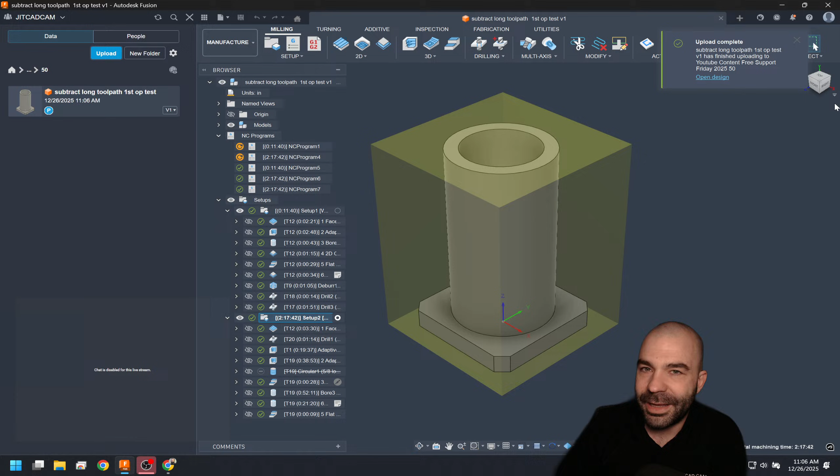All right, so first and foremost let's take a look here. Setup 1, let's get this in place. We are utilizing a stock box point. Now, given that it is a stock box point, our stock is fixed size. We're on center, on center, on center. Everything's checking out here pretty good.

Now, when we go into setup 2, let's go ahead and take a look here. Model box point. Now this shouldn't affect anything, but we're going to pull a couple of dimensions here.

This is my opinion at the end of the day, right off the start, Elijah. I would tell you instead of using model box point, you might actually do something like selected point and then grab this ring at the top, because I assume you either don't have the bore here—actually, you're upside down, right? So as you can see, I can get on center of the bore at the end of the day. That might be much better for what you have.

So as you're going to see, we now are going off of that exact edge. Let me read through—you're putting a lot in chat, so I'm going to get everybody caught up here. The last time you tried to run the end mill, it didn't even touch the face of the part. The end mill was way too high.

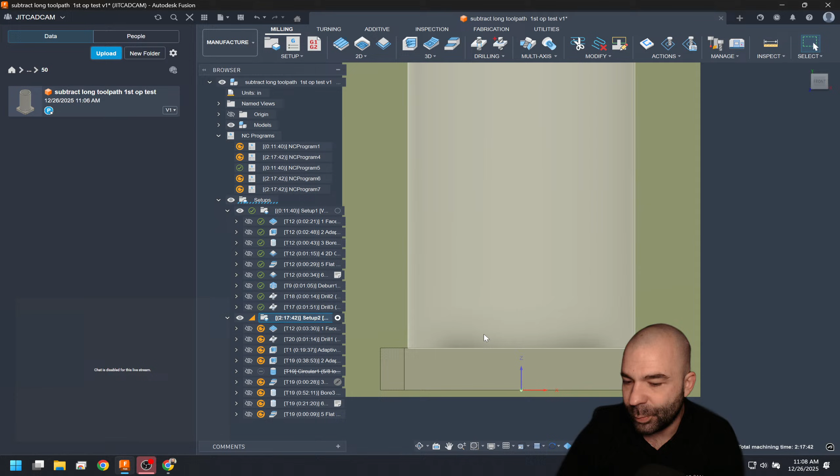Let's take a look a little bit further now. First and foremost, it looks to me like you are touching the top of the part. Your G code here is going to come from the actual WCS system. A few things I would look at—let's just make sure this is on center. So we're 118 there, for those of you out there, we'll go out to 4 decimals, not that we're going to see a difference. Again, we're going to go bore back the other way. We're 118, so we look to be on center in X and Y. Now, from that, I would say everything kind of checks out from a G code standpoint.

So what I would tell you now is if we posted this exact code, we're going to go ahead and put this through. Actually, we could use the dumper—actually, we can't, because I don't want to waste time trying to pull it through another post. If I remember correctly, what kind of machine do you have there?

Jeff, another top tier subscriber—Merry Christmas to you, buddy.

Let's just go ahead and put it on a Fanuc. It'll be all right. What we're looking for is XYZ. So right off the start, we are Z call out 4 for G01, 4.08. We're doing a G18 to 4.03, and you have I, J, and K motions. Again, we have a vertical lead arc.

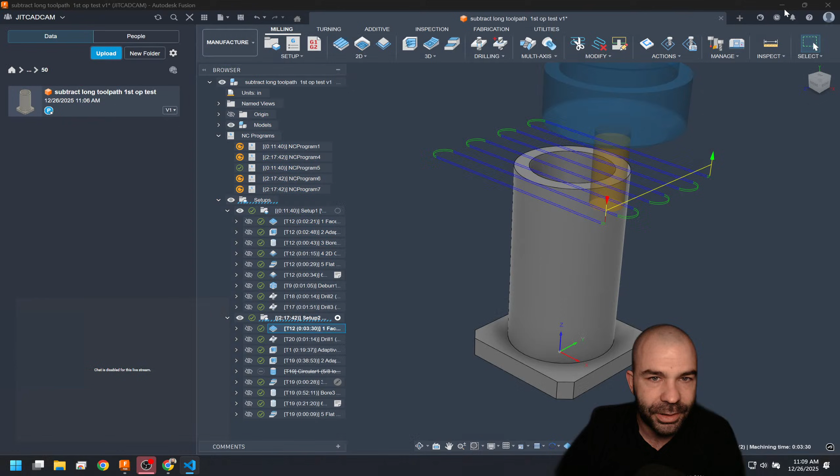So let's take a look here real quick. We're at 403. Measuring this guy out, we're 4 even. And with that, I would assume you are making multiple passes. So this is some tricks you guys could do when you're trying to troubleshoot something—I'm just looking for the math, which means I am zeroing out vertical and making a single pass. Because the G code, if it's not touching in Z at all, is the G code wrong or is the machine setup wrong, right? As you're seeing now, we're going to Z 4 inches exactly.

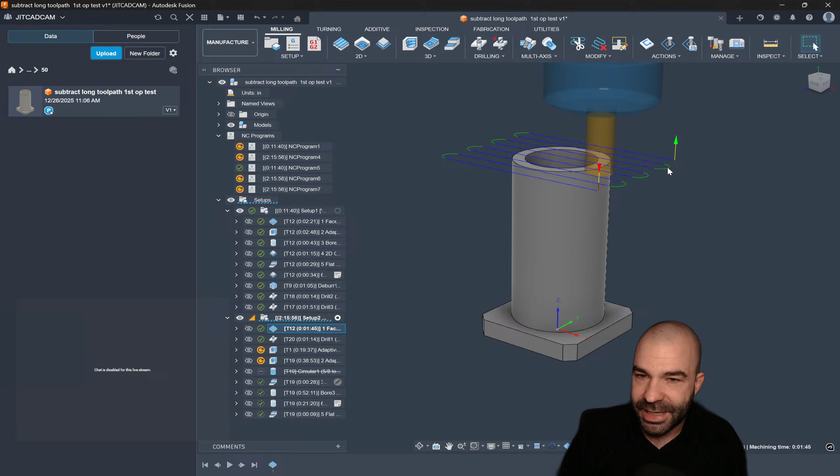So the face is 4.0625 high, and the actual part is 409. I'm touching off the jaws itself. Okay, we're getting a little tricky here because your math that you're telling me in chat does not line up to your physical part. So again, if I measure the length of your part, the length of your part is exactly 4 inches.

But you're saying 40625. Let's go ahead, let me do this—give me 1 sec here, guys, we're going to run through this. You're already facing off the back side of the part, which means you should be at 0. I think I kind of understand where your dilemma is coming from, because up here you're touching the stock, right? And then your stock is 4125, but because you're on center that would give me 0625 per side, right?

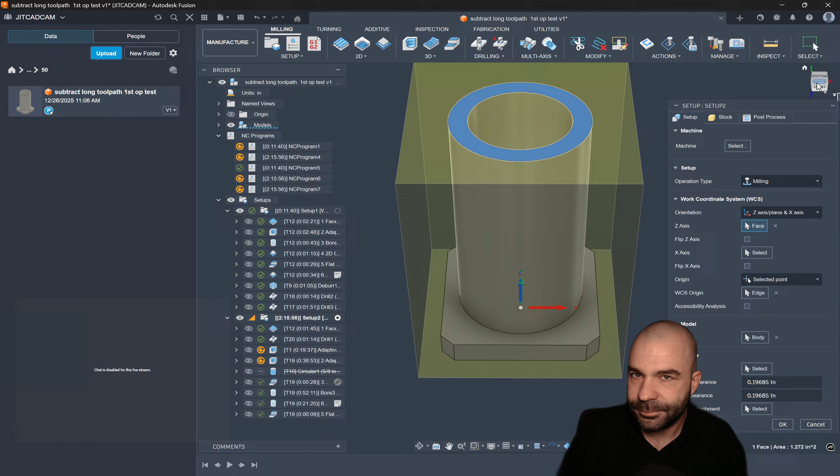So when I flip my part over, I've already accounted for this. Let me get this closed up so you guys can see this a little bit better, 0625 here. So you're saying from my WCS to the top of my stock should be 4.0625. Yeah, so that checks out at the end of the day. As you're seeing right now, based on the math, 4.0625 is the top of your stock. That's correct.

So I guess my question, and we could demonstrate that here. Let's do this. I'm going to run a facing program, and we're actually going to machine to stock top, not model top. Then we will bump our top height up just a hair so we don't get any errors. If I post out this one now, this would be in a perfect world for you guys wondering. As you guys can see, I'm now at Z 4.0625, which is where my Z height is for facing off.

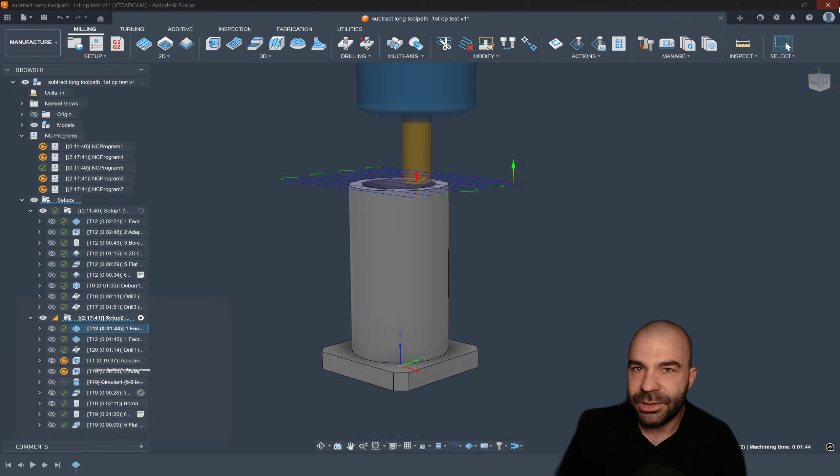So there is facing across the top of this part. And because my stock—if I do my fancy dancy F8 here, and of course we need some transparent stock, looks like we're not going to get it the best here—but as you guys can see, I am facing off at exactly stock 0, which is 4.0625. And then I have a secondary facing on model height, which is now touching the part.

Right now the part is 409 and the end mill is still not touching. So a couple things I would suggest: check how you're holding this in a jig and fixture. Is your Z height in the proper location? That's always rule number one.

I am going to scroll up here real quick. Fish, out there, sometimes I'm generating a body for a new job to see where and how I will run the part. The setup tab does a good job generating stock, but I want an actual body to use for fixturing. Okay, M-Fish, I will visit that here in a second.

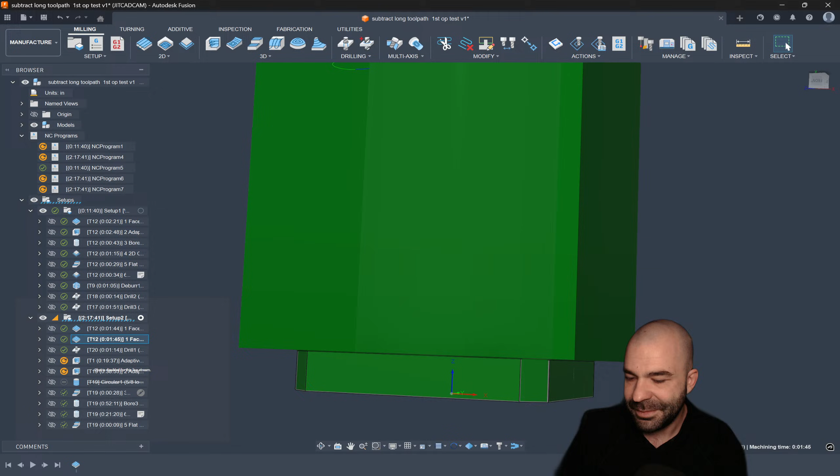Using a Haimer—well, are you lowering Z height on the Haimer? I'm not trying to call you out, but presumably what I would suggest, Elijah, is that you need to check the math on everything.

So if you're using a Haimer, you don't have a presetter, which means you're setting tool lengths manually. Where are you setting tool lengths off of? That would be my next question. Getting back to the question from M-Fish.

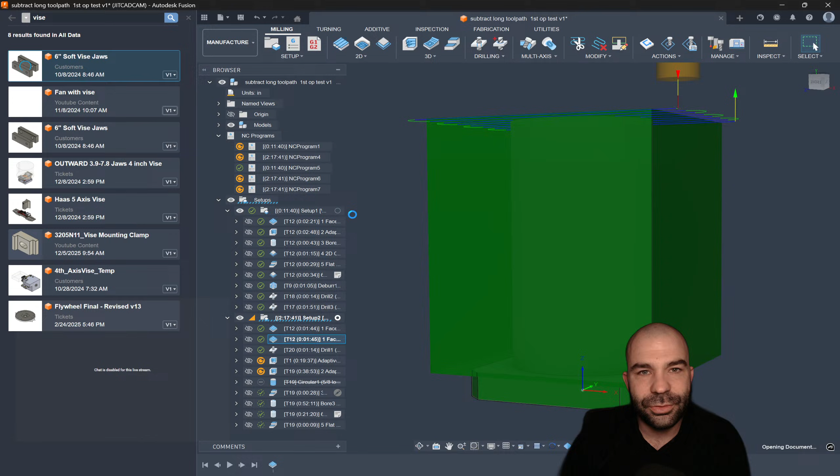M-Fish, we did several videos on this, but what I would recommend when you're talking about your stock being a solid—this is where we've done videos on vices and using parameters. Now, full disclosure guys, some of these videos might be a little dated, but the idea is still the same at the end of the day: when you have your vice and your stock and everything in place, that's a solid body. Now if you want, Fish, for me to go through and set everything up from there, let me know.

Okay, the table with a Haas digital tool setter—so you have a presetter, but you don't have a spindle probe, right? And I assume when you touched off your presetter or your Haimer, you allowed for the distance to get to the center of the ball. I'll give you a minute to answer.

So if I was looking at wanting to do something with stock, real quick here Fish, this is how I personally would do it: you would start with a new file. Let me get back to my Free Support Friday folder. In that actual model—this is a little bit of organization that I use, guys—I start a new folder, and this might be my part number. Let's say it's TAC 1001. Inside that folder, I would need the part.

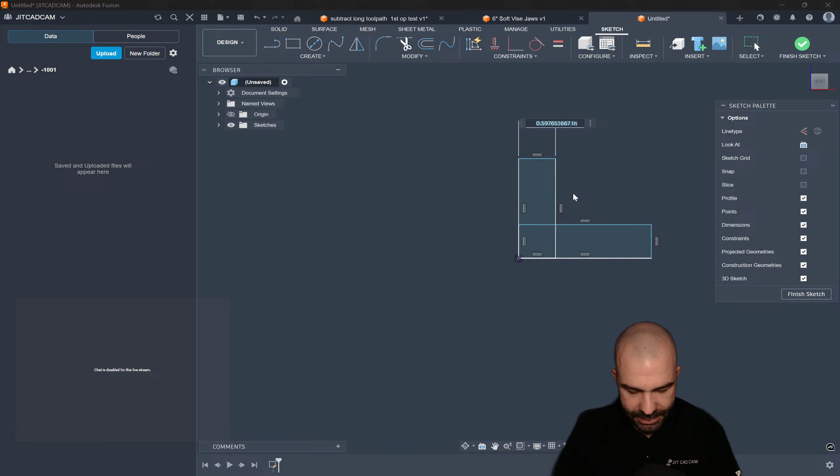Now I'm going to generically create a part real quick just to demonstrate this out. Let's say we're working with something like an L bracket, 0.5, 2 by 1, and let's say this guy's going to be 0.250. So let's say I need to make this part. As you're going to see, this is going to be physically the part.

And you would have already uploaded that. So just be aware. From that, though, this is where I would start a blank file.

And this file in itself would actually be like my TAC 1001. And then I like to call it my manufacturing, because this is where I'm going to apply my toolpath.

That allows me to insert my part into this file by dragging and dropping and link it back to the original. From there, I have full freedom to go in and make a new component that is going to be for the stock itself.

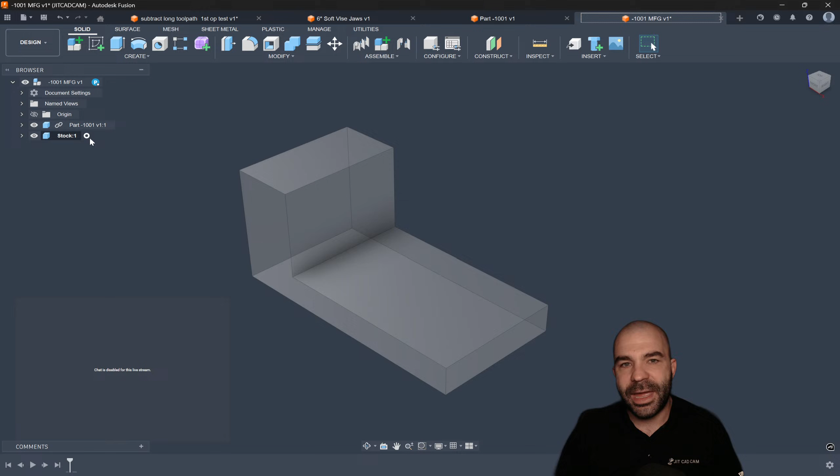And with that active, I can generate my stock. So if I wanted to simply create a box, I'm going to go ahead and create a box here.

And now this is going to be my stock size. Let's say we're going to go 3 by 4 by 5. I know this is obnoxiously big, but I think you guys are going to get the point after the fact.

Because these are components now, this is where I could do something like a joint to place my part inside of my stock and lower it whatever that distance is for manufacturing.

So as you guys are seeing me do this, it's a little messy because one, my stock is in the way, but now I have a physical solid for stock, and then I have a physical component that is my part.

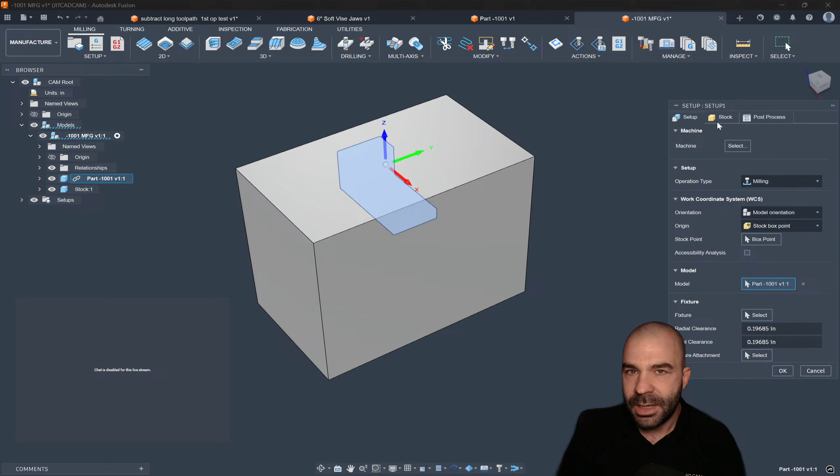So again, we're going to go from solid, pick that stock. And just like that, I now have a solid versus my part.

It has a little disc that you push down and tells you, okay.

All right, jumping back a little bit. Elijah, the main problem is the tube is offset from the square. In my last attempt, I drilled a hole all the way through the part, and I'm going to indicate it and run it.

So a couple of things, Elijah. One, you should send me my favorite price tag of two blank checks and have me fly out there and help you.

But what I would go back to and talk to you about on this part is if you're having alignment issues from setup 1 to setup 2, I don't think it's in Fusion, because I did make the change of going off of stock box point or selected point from model box point like you had.

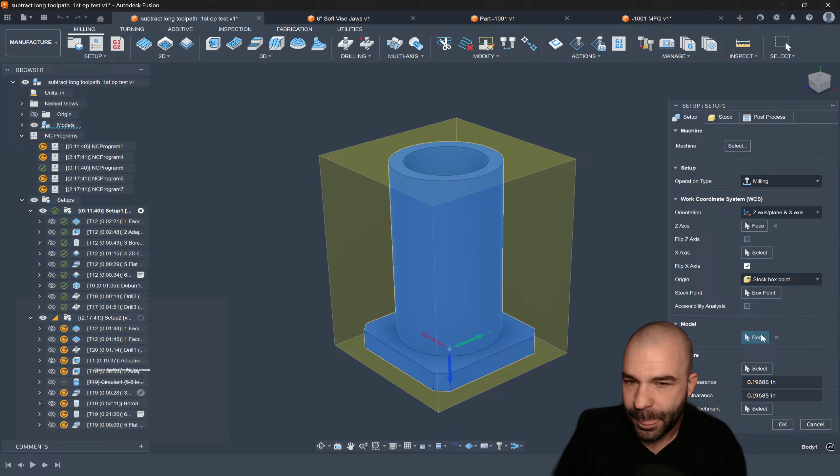I don't think this is your problem, if I'm being honest with you. The only reason I say that is because when I now looked at your design tree, there's quite a lot going on in here. Now, if I needed a specific component, I always go off that physical component.

Again, I see you got stock as a fixed size. That's fine. But now my continuous rest machining is going to require me to also select the same model down here. I don't think this is your problem from what I'm seeing as a whole.

I just know that that could be the problem at the end of the day. Again, let's just go ahead and get everything regenerated here. But yeah, from what I'm seeing, I don't think it's a Fusion issue at the end of the day.

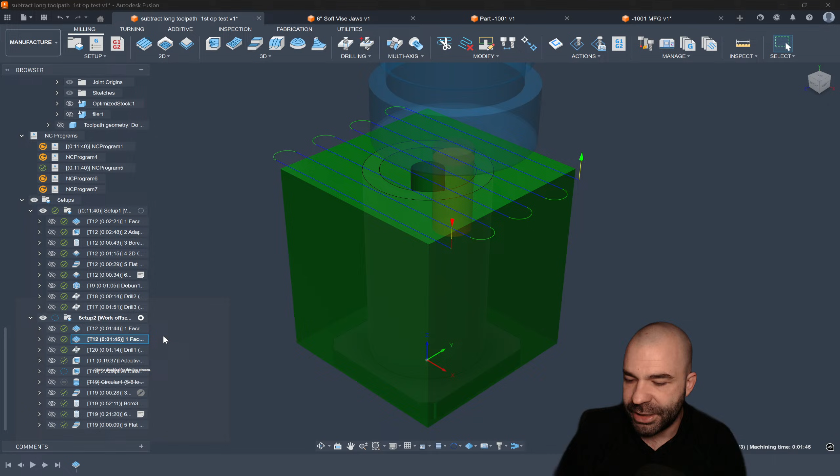I think it comes back to more of something is happening when you go to set up this part. Maybe there's something wrong with your Haimer, because again, this hole 118 this way, 118 that way.

This all looks good. This hole is on center of this hole. There's no error on distance. Again, all of this stuff is checking out pretty good at the end of the day, so it's hard to say exactly what's going on.

Use the setup tab to determine the stock size you need. Can you make it a solid and locate it based on the setup information?

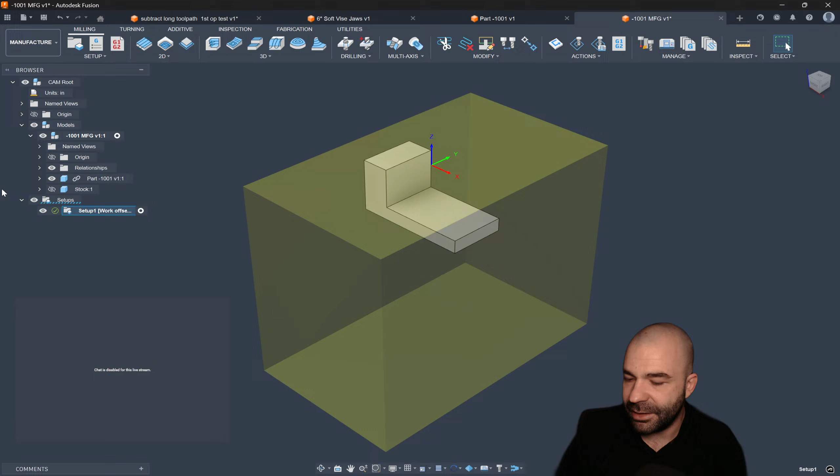So Fish, maybe I'm not getting exactly what you're looking for, because at the end of the day, I showed you guys you need to make your stock either a solid to control it, or if I was running a setup, I'll make a new one. Part, stock, solid. If you're trying to align this a certain way, I could offset left side 0.1, offset from top 0.05 for facing, and offset from backside 0.1 as well. As you can see, I've shifted my part to a certain corner of the stock.

I need to see exactly what it is you're trying to do outside of that, Fish.

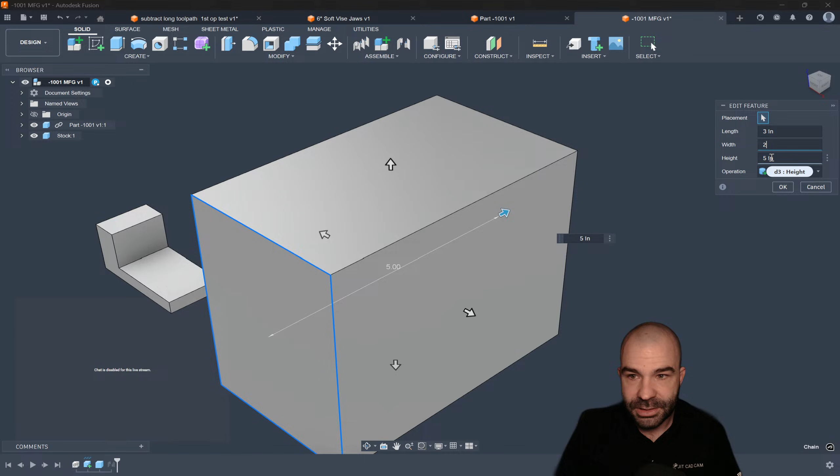As you're seeing in this setup, I'm using fixed size box. However, on the setup side of things, that first time round, I have a solid that I modeled. So if I went back to design and changed that stock size I generated, let's say we go 3, 2, 2. As you're seeing, I've now made that stock smaller. Pro tip for you guys: depending on what you're doing, you can change the opacity of your stock to make it easier to see your part inside of it.

You had a machinist buddy set up with you and it still came out wrong.

So let's do a little bit more diving into this then. I do want to let you guys know, I see a lot of people coming and going here. If you have questions at any time, anything in particular you want to see, feel free to ask in chat. There's also a support link down below for you to submit a ticket with your problems.

Got to get me another chug of some coffee here.

So, diving back into this a little bit more. Let's go evaluate a couple of things real fast. When we are posting out right now, we are using the latest Haas pre-NGC post.

Now something you guys can do out there, I'm going to pull this up on my other page and bring it over. Although the post may have gotten an update as of 10 days ago, we can see what has happened inside those updates. Based on this information - fixed under warning messages, fixed a potential issue when outputting multi-line comments - all of this stuff seems to be all right on my side. I don't see anything different.

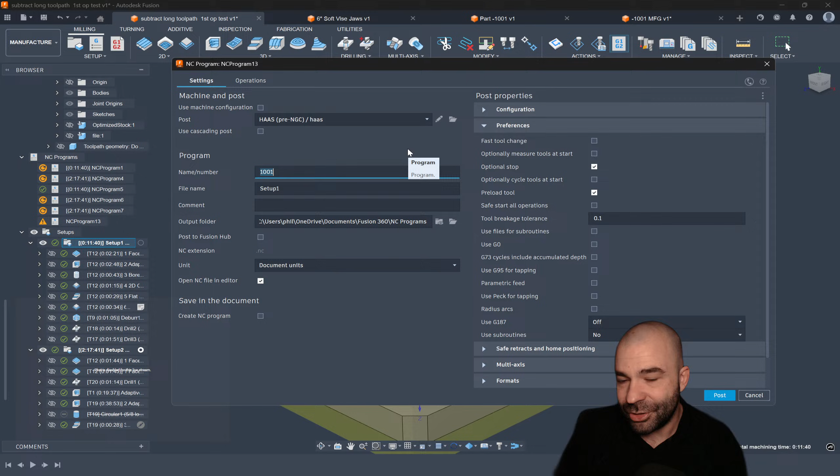I'm going to go back to that original toolpath. I took some stuff off of your toolpath as of right now. But if I post process and use the dumper - I love the dumper post, that's in your default post library guys - what this allows me to do is get some mumbo jumbo worth of information. But if you have the Autodesk post utility installed, you now have the ability to do a custom.

You guys see this? I assume this is behind the chat window, let me scoot it over here. Let's half screen it, right? So as you guys can see what I'm doing now - my big head's in the way, I can't win - under CNC selector, this is a debugger.

Now you're going to get what's called the custom, and what that's going to allow you to do is generate the exact program off a post. So let's get our posts now opened up.

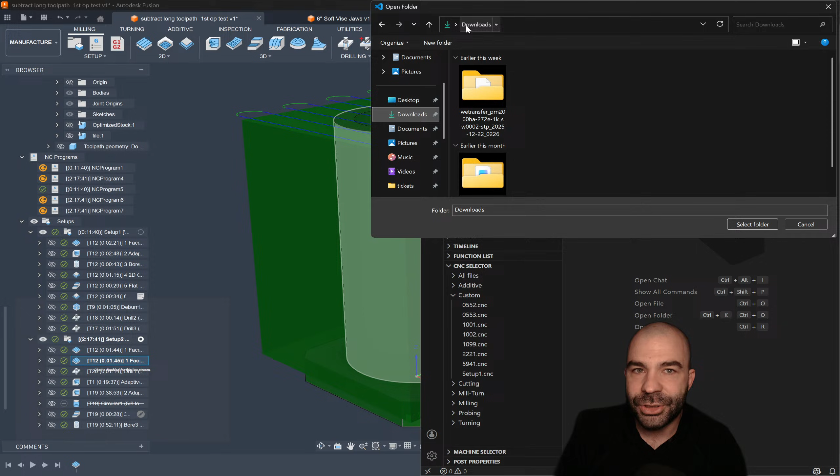I'm going to go ahead and go to my downloads folder, which for some reason I'm not seeing the post processor in here. Oh, because we're selecting the folder - what a goofball, right? And then we're going to go ahead and close this all out. Now you can see I have a lot of things in my downloads folder.

As you're seeing, I can go ahead and open up both these posts. I'm going to go back to full screen now, guys, you're going to have to bear with me. And then we go to custom.

As you're going to see, depending on what post I click on, if I click 1001, there's the code generated. Based on this rev, right now my Z is doing a lot of funkiness, so I think my 1001 went to the wrong area. I'm going to go back and fix that - should actually be setup 1 NC.

But what I'm going to do is, again, 1001 here, 1001 there. We could generate code off those posts in real time. So give me 1 sec here because I'm going to go back and repost that code. We're going to give it a number. So it should be setup 2, but let's go 2001. And let's just say it's also 2001 here.

And this is the problem. It's putting it in a specific place. That's fine. Let's see if we can refresh this list. Maybe I'm crazy, maybe it's putting it in the wrong place for some reason and I'm just not seeing it. I might have to do some debugging on my side, guys.

See if it's in here. It is not in here. So let's go ahead and copy this address. Go back to Fusion for the last time, hopefully. There we go. And let's get this closed out.

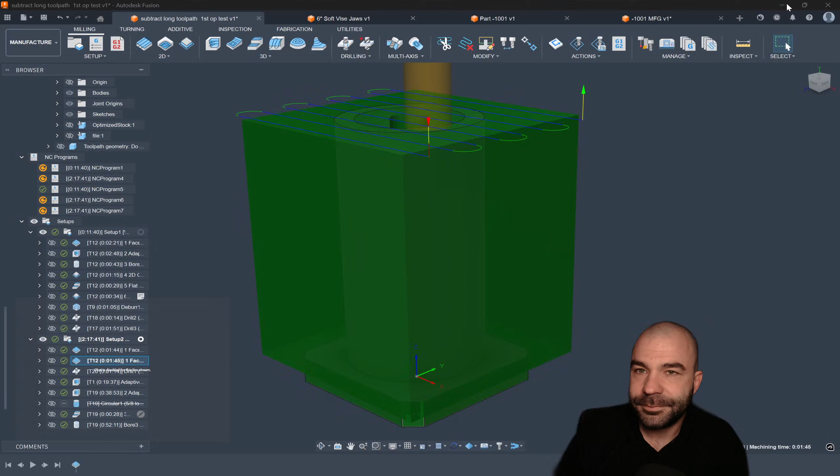Y and X were wrong also. So, I mean, the only thing I could tell you is, one, Y and X is off, Elijah. So you got X, Y, and Z all off in some way, shape, or form, right?

That's what I'm hearing. So if somebody came to me and said my X, Y, and Z is all off, I think there's a problem with your Haimer. That's what I'm going to tell you. Honestly what I'm going to tell you. And that's without physically being able to put my hands on it and see what's going on. There's a lot of questions.

I mean, M-Fish is right. The Haas does have the ability to put other offsets in. You've also used an edge finder. Still wrong.

I don't know, man. I really don't know, because at the end of the day, if I was to also do, and this would just be my sense on this, I'm going to do a 2D contour around this part, right? And if I post out this 2D contour, again, let's go ahead and get back to that Haas pre-NGC post.

Does my Z's all seem to line up? And then is my XY also working? One thing you guys can do, again, this is just something if you guys didn't know, go ahead, file, save as this. Looks like it's saving to where it needs to go, but we're going to go ahead and throw this on my desktop because, again, we could take our NC code and run it through something like NC Viewer.

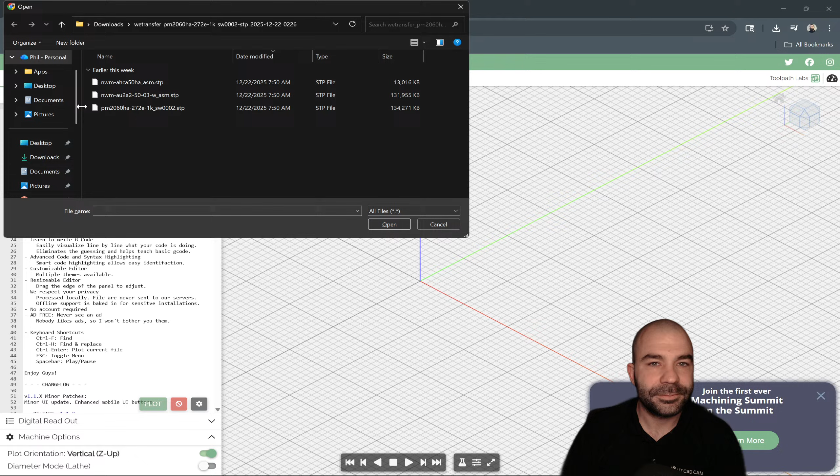So give me a quick second here, guys. I'm going to bring this over. So again, we got NC Viewer. We're going to go ahead and pull in that setup 2 file. And what we need to do is Z up.

Yes. And then here's our digital readout. So again, to me, as you're seeing, this is my origin and this is my plotted line. So it looks like everything is plotting even correct with the latest post in XY.

Give me a sec, guys, here. I'm going to jump back so I can see you guys' chats. There we go.

I ran another part and it checked out okay. G52 is off. So the adaptive.

Because the square is off of the pipe. Do the adaptive. Elijah, this is something I'm gonna have to tell you to pump the brakes on. Let's jump on the phones after this and kind of walk through and talk it out.

Because again, it's very hard sometimes to troubleshoot certain things. There could be a million reasons. I don't know why. Something sounds off that all of a sudden your machine works fine and now it doesn't work, right?

No worries, man. We got CAD user 99 out there. 5-axis machine that doesn't use DWO. This question comes up so much. We have video content on it.

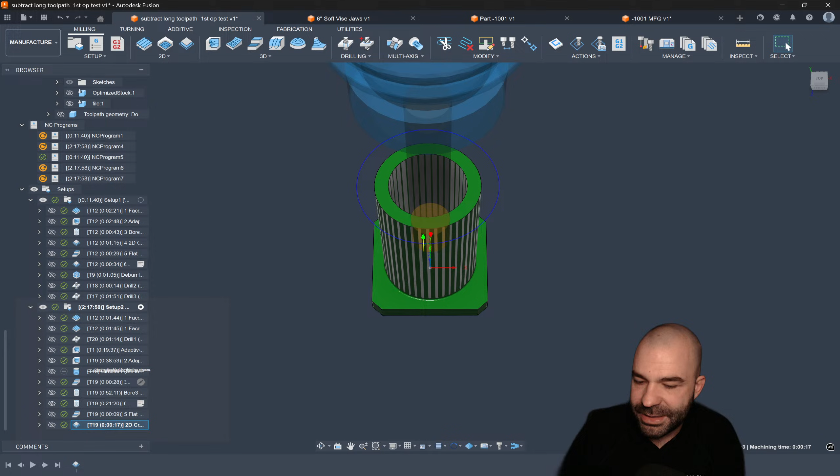I'm going to have to troubleshoot this later. I'm going to jump back over. I guess, CAD user, what is your question about 5-axis? So I know you don't have DWO. What I'm going to tell you at the end of the day is you're going to have to program from center point of rotation.

Now, I'm going to steal Elijah's part here because it will work very nicely for this. Now, when you don't have dynamic work offset for you guys out there, normally on your part, this is a hard normal, you're going to probe top center of your stock. And then if I was to put this on a 5-axis machine, lucky for you guys, I only have one million of them. Give me a sec here.

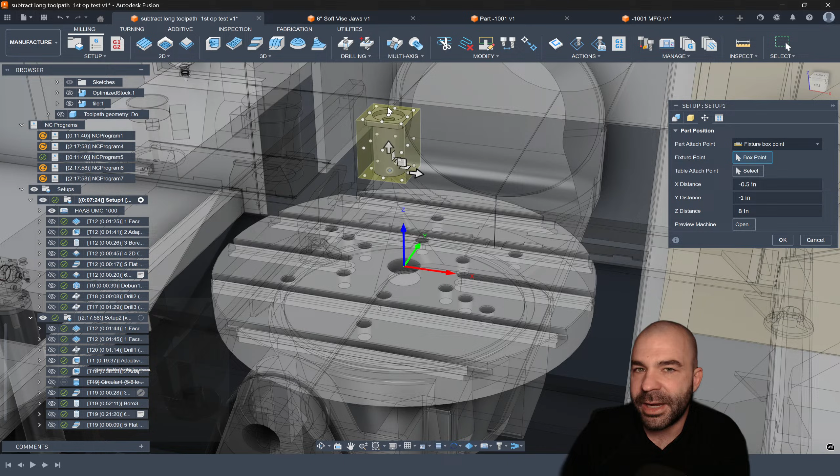This would sit on top of some vices. It would be up in space somewhere, right? And those vices may or may not be perfectly on center. It's not a big deal, but what we're doing is the controller would then handle the math from center of rotation, which I believe is about 2 inches above the platter on the UMCs, from there to the top center of your part, right? So let me get this back into place. And again, you have your facing procedure and things like that.

So, yep. So I'm going to get to that real quick here. So with that, you run a part over and over in a 5-axis that doesn't always go back into the machine at the same exact location. So there's a couple of things I would point out there, CAD user, is I would need to know, one, what is the machine itself? Most machines have the ability to turn on dynamic work offset if they were made within the last 10 or 15 or so years.

Now, with that, what I would tell you, this is my trick that I use for you guys, is in the design workspace, this is where I would actually use what's called a joint origin to control whatever it is that you're trying to position, right? So if I go joint origin and I go off the top center of my part, as you notice, what I'm really looking to do is place that point based on whatever the compensation is when I probe my part in space.

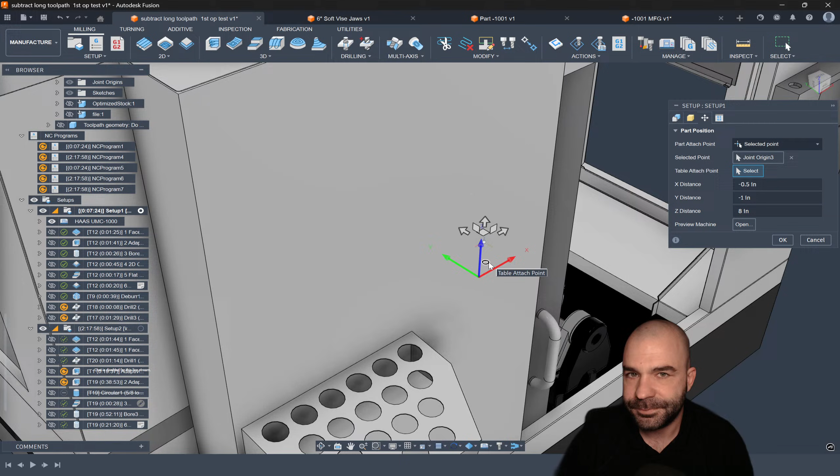So it does get messy, and we do have a video on this. This is where our custom training comes in to be very, very handy. But the idea is now in the design space, I control my part shift with the joint origin. And then when I go back to the manufacture side of things, or when you're physically on the machine, that is where we're going to place that point. So again, I could go selected point. This point here, and this is a terrible model, guys. Don't use these models. Feel free to reach out to me at any time. We'll get you guys set up.

So we're going to put the joint origin on the platter to make life easy, and then you would have zero compensation here. So as you guys can see, with that setup, I still need to control my WCS. Again, this is where, kind of like EJ's part earlier, we use a selected point. I pick that point down there in space, and all of my G code comes from that point, and that point is basically the center of rotation.

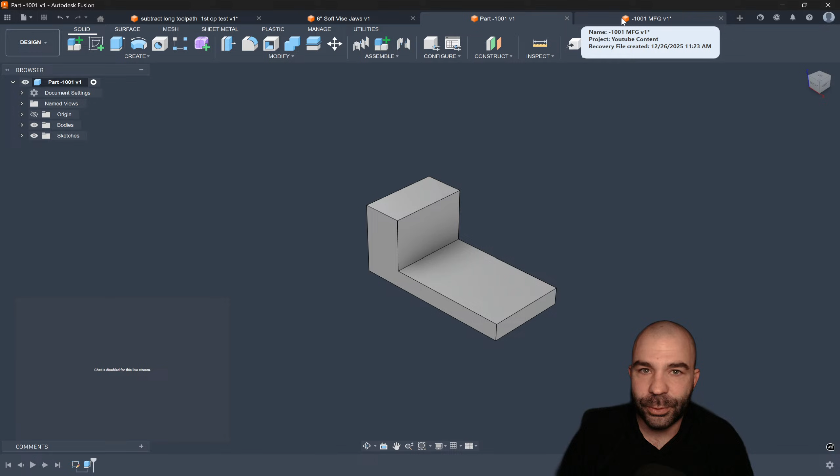All right, M Fish, getting back to your question real quick here. So one thing is, as you saw me do in this file here, we went ahead and created our stock from a solid. Now you're saying is if you were doing something and you were using a relative size box and trying to round up by a specific amount, now you don't need to do that right here inside of the CAD or the CAM side of Fusion.

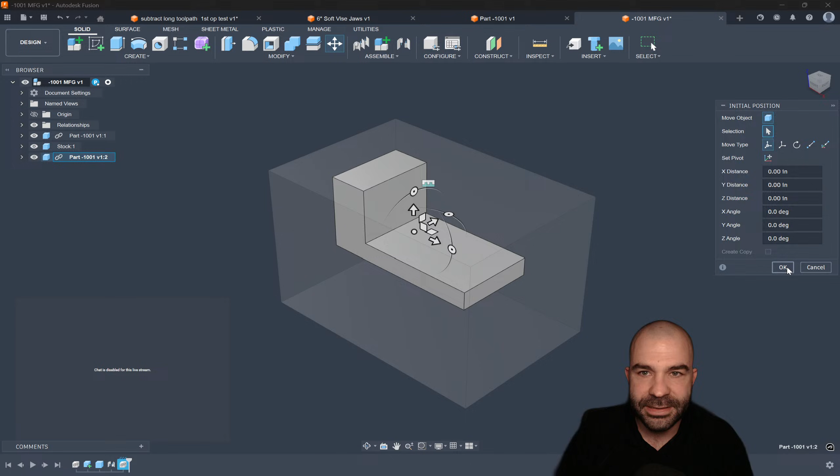What you're going to see, I'm going to jump back over to design, is I have the ability to go in and utilize a simplify and replace with primitive, right? So this is something you could do based on your part file, but what you're going to notice is I can't select this part on my screen, and that's because it's still linked. So what I'm going to do is I'm actually going to copy this part, and then go up to the top and paste. Now you'll notice I don't get paste new right now, because that is still going to be a linked component. I would then break the link, and that would allow me to now activate said component, and then do my simplify move.

So again, simplify, replace with primitive, and then from there, you're going to see that I have the ability to round that up based on whatever it is that you want to do for your stock size. Again, this is a little bit different way to go about it. We could go box, cylinder, sphere. This is a really good one if you guys are dealing with round stock to make square parts. This is where you can adjust this any way you want to get that part in position. This would then become my stock, and away we can go. So this is just something you have the ability to change up and shift around and play with.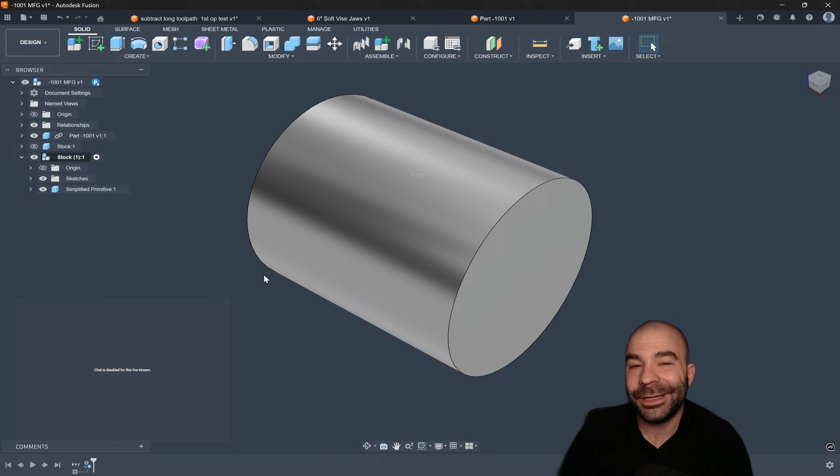Oh, you're looking for how fast my ability is to address customer issues. Guys, our support ticket response time is sub 7 minutes for most things. So, yeah, no worries, man. Right now, a lot of people ask us about our services, who's all over here. I am the only full-time employee here, for the record. But that being said, if you guys reached out to us and you have our service plan, a paid support plan through us, we prioritize you faster than anybody.

Now, in most cases, if I'm live on YouTube and one of my customers had an emergency and needed help right now, I would either have to put you guys on pause or reach out to one of my contractors to get you set up and going ASAP. As most people are always worried, how fast do we get responses out? With the exception of post work, a lot of times within the first 10 minutes of your ticket coming in, if you got up and went to get coffee and came back to sit down, you'd usually get a response.

So again, I just want to get back real quick. Fish, if you're seeing what I'm doing, this is kind of a way you could go about it. Now, I would need to know a little bit more information on why you're using something like relative size box versus our fixed size boxes. Again, this is my opinion at the end of the day.

For a lot of you, I never use relative size because I can't order material in relative size, unless you were getting flame cut parts. That would be the one way to look at it, right? There is the option to do the whole bounding solid thing. Again, we played with this in the past. I really need to just sit down and learn it and figure it all out.

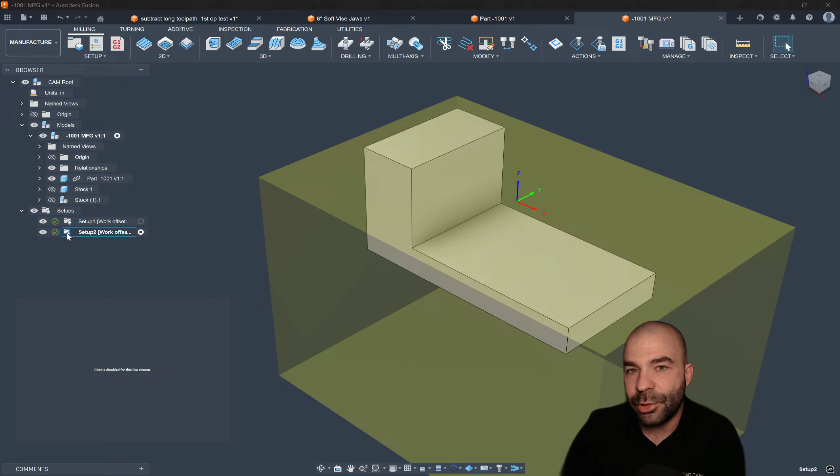I could see that you're rounding it up for that. It's faster, but I guess, again, I don't know your end application, right? Because to me, if I was using fixed size box and we were center offset from Z-top, and then you were using the ability to round up to nearest, I don't know why you need, at the end of the day, the ability to adjust more than that. That would be my two cents on it for you guys. What is your end goal, right? That's all.

Kramer, out there, there's not a lot of resources. That's my problem. Yep.

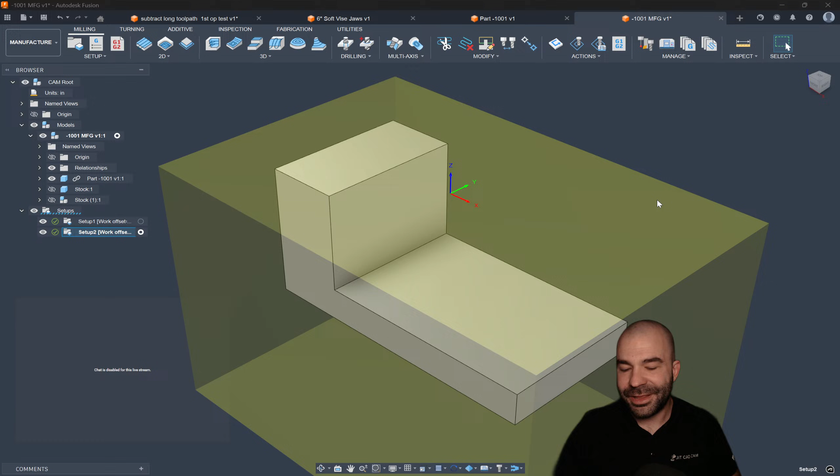Going back to the DWO question, I think somebody was right. They did say we did do a Workflow Wednesday. Where was it here? I gotta remember what it was called. It might have even been a Free Support Friday, but it was a center of rotation question. Hey, you know what, it might have been... where would it be? In our older Fusion Friday content. Multiple setups. Side mounted vise, remember that one? It was a good one. You guys would have to tell me what the file was. I can't remember.

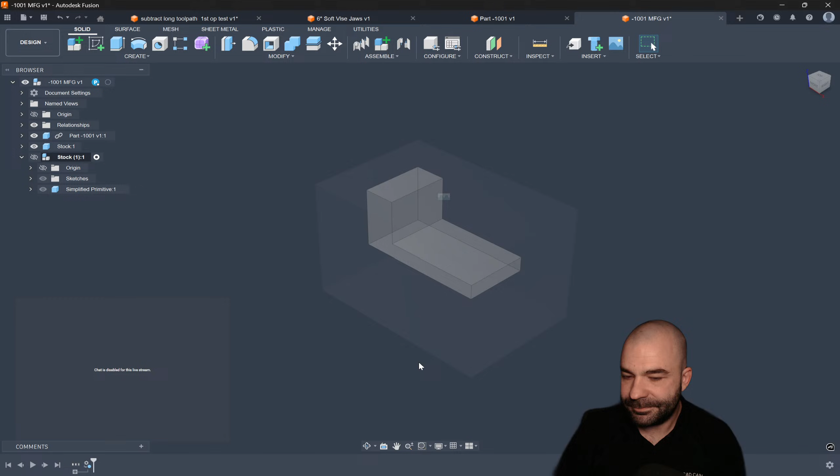So again, Fish, I don't want to tell you it seems like you're doing a lot of extra work. You just seem to be going back to the fact that if you're designing a fixture, I would have just generated my stock in my fixture, because then my stock controls my fixture, right? That would be my take on it. I think you're making me do too much work, because if we went back to this, this is just a good example. Give me a sec here to see if I can find one. Only built these things 3,000 times a year, it seems like.

So this would be my recommendation for you, Fish. You're going to see this is lineage not found. Let's go, 404 error baby. All right, show in location. Oh, for some reason we have lost our part file. Let's go ahead and look at a different one. Where is it here? Workholding.

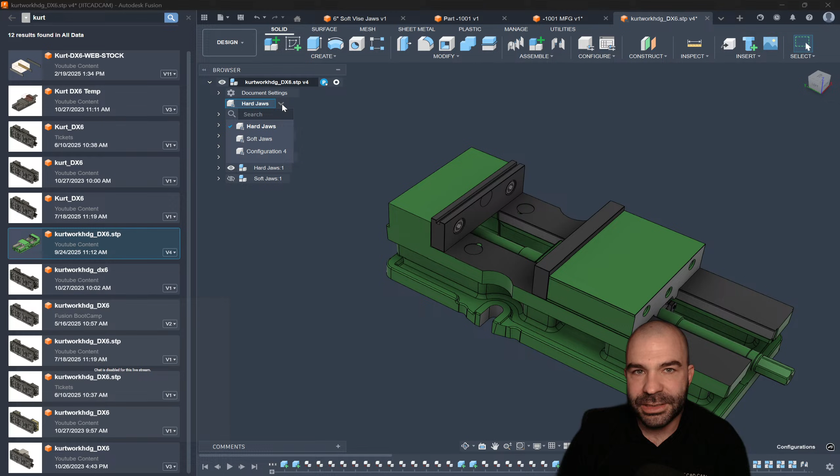We'll get one of these to open up. But again, here is, I don't think, did I make this one parameter or not? I did, okay cool. So as you guys can see, as you're seeing, we have the ability to control this in a lot of different ways. Now I did this vise based on a configuration table. I want you guys to know that right off the start, we have a soft jaw configuration, we have a hard jaw configuration. I believe I also have stock in here, as you guys are seeing.

Go ahead and get to my stock. This might be tricky for you guys to see. Let me try to get it a little bit better, change some opacity here, because I think I have this turned down. So as you can see, I now have stock between my jaws and everything, Fish. And this is how I recommend doing this, because now that the template is built out, it goes back to that same calibration as Kramer was asking about, the ability to do a container method. I put the part in the stock, I load it because it's a component, and then I adjust my stock. So again, this is where you have a lot of different settings you can control at the end of the day to move your part around, set your spacing, things of that nature.

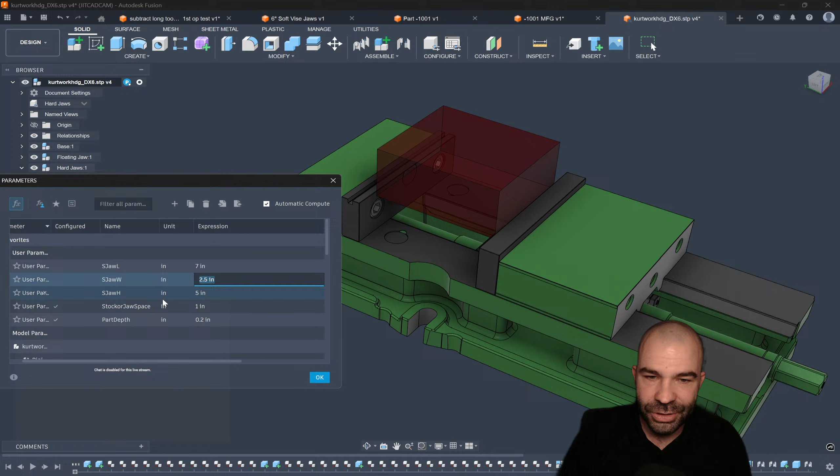So again, you have your stock height, maybe it's 5 inches tall, you have your stock width. Again, I can't remember the full extent of how much this one was controllable. This was built for another project, but this is what I want you guys to see at the end of the day. So any questions outside of that? So again, this is the way I would do it. Then you place your part in the stock and away you go. And we have videos on dovetail vises, we have them on Kurt vises and other things as well.

So getting back, Ash Design: how do you calculate surface feet per minute for a tapered end mill? I'm having trouble with a good feed and speed for a good surface finish on aluminum tapered pocket. Ash, can you send me the minimum diameter of your tapered end mill? That's what I'm going to need to give you some good calculations.

Fish was definitely doing too much machine work for sure. Getting in, my main concern from CAD is when I have to make the part again, I would have to regenerate all my toolpaths. Not true at all, buddy.

So again, going back to that idea of utilizing a joint origin, actually you would still need to generate your toolpaths all over again, I believe. Let me just double verify that. As you can see, I'm calculating my toolpaths right now based on a joint origin, and stock is now updating. But if I went back to the manufacture side of things, or design, sorry guys, move my joint origin maybe more this way.

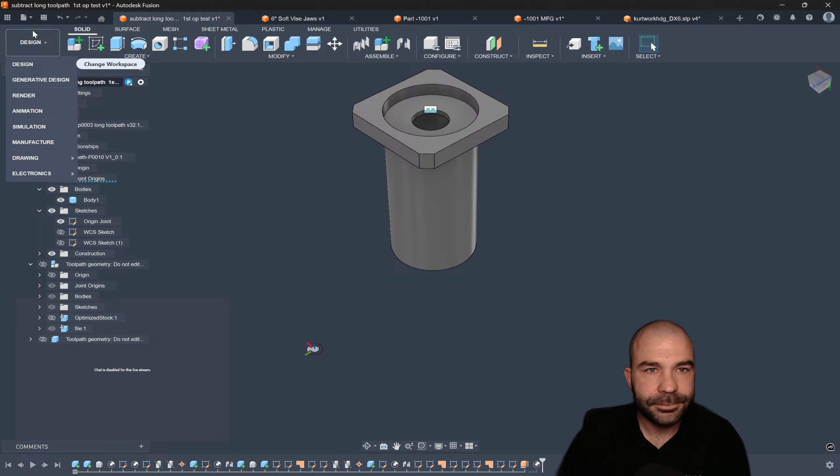And then we go back to manufacture. Yes, you still are going to have to regenerate those toolpaths.

Now, again, this is just me saying, CAD user, please send us an email, or put in a support ticket if you'd like. I want to dig more into your DWO issue because something sounds more off with your DWO than anything else.

You ever measure chamfers with tooling balls? I can by all means. Give me a few seconds here. Locate a sphere onto a chamfer. We'll look at that here in a second, Fish.

Current software runs a macro, and I input the new XY offsets to the software, and it changes the XY moves automatically. So yeah, that sounds like you're basically translating the information.

Now, again, CAD user, this is where we get into technicalities. We can do that. We could build you a post processor with a macro shift in it. That is completely doable, to take all of your XY commands and shift them incrementally based on a macro, or two macros, in your controller.

0.06 ball end mill on the small side, 1 degree taper per side. So 2 degrees inclusive. That's awesome.

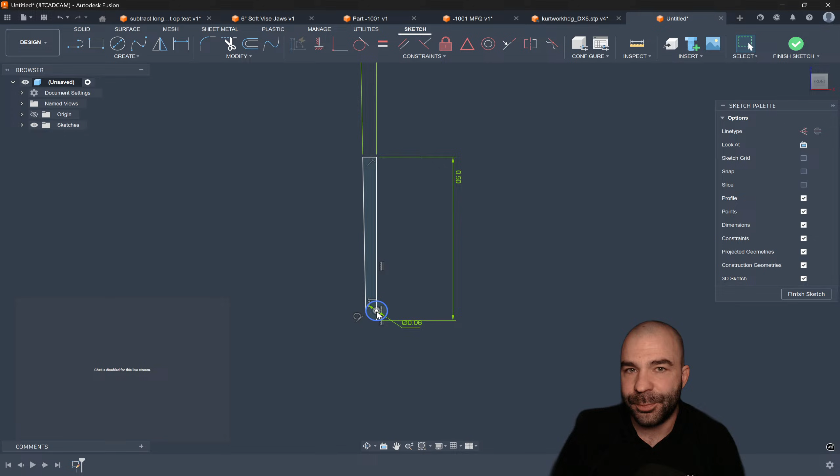Now, there's a lot of reasons as to what's going to happen. Again, this is just one of those things. A 1 degree taper is not crazy. But if you were to deal with something more like a 5 degree taper, the diameter down here at the bottom is still 0.06 versus your diameter at the top.

Now, pro tip here guys, center line, we change it to a center line. And when you do your dimensioning off a center line, you can see that this is a reference diameter, but that's a 142 at this end, and an 06 at the other end, right?

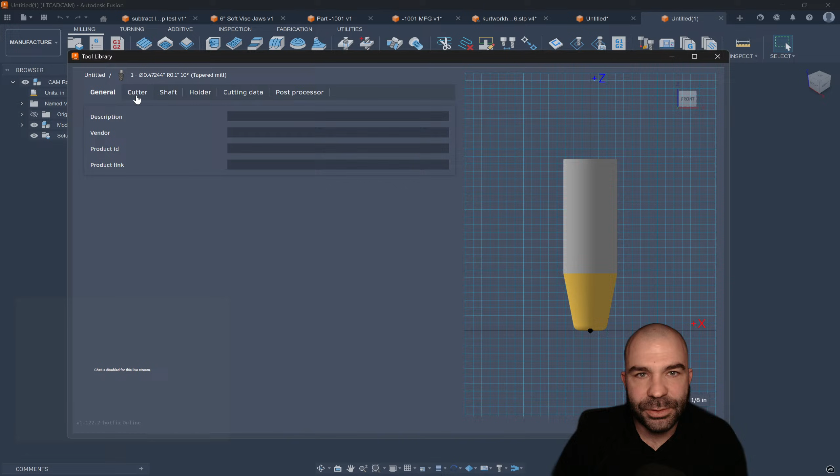So if I was now dealing with a tool, I'm going to go to a blank file. We're going to go into my tool library. But let's say I'm going to build a tool here real quick. That is going to be a tapered mill. And as you can see, when we talk about the cutter, the diameter right now is based on the tip itself. So again, this is going to be from outside to outside, basically tangent off those walls.

So with that said, where the real fun begins is when you start to get into all of the other math on this. Again, we have a 1 degree taper. We're dealing with a corner radius of, what was it, 0.062 divided by 2. And then our diameter is 0.062. And as you guys are seeing, I've now recreated more or less that tool, right?

So again, we have a shaft diameter here. This is going to be a little bit crazier math. And then you have your overall length below holder, yada yada yada, as you move down that tool. So again, going back to my drawing, did we do 0.5 or 1 inch? I can't remember. But again, what you're seeing is how I'm building out that tapered end mill.

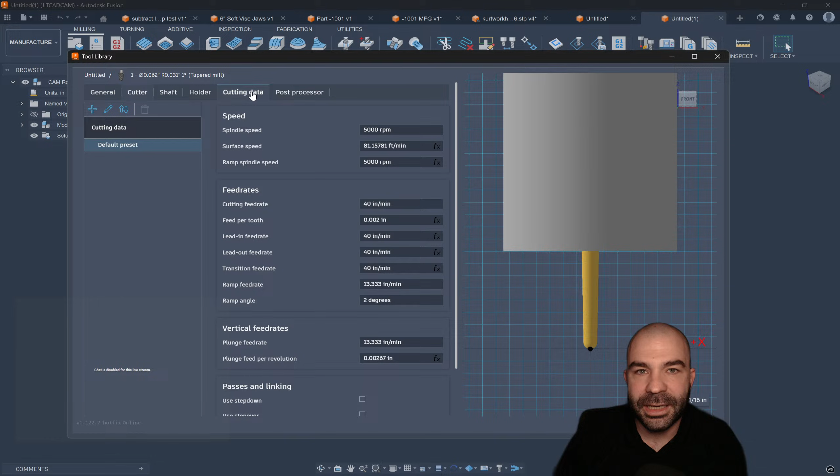So as you can see, getting into our cutting data, our surface feet per minute is still going to always be driven based on an expression, which is going to use the machinist handbook method, right? So we do need to make sure that our cutter is showing the right number of flutes to get a proper surface feet per minute.

Now, to go deeper in the weeds than this for you, a lot of you guys out there, this is where we recommend using something like HSM Advisor or the G-Wizard calculator. They are both very, very powerful tools to help get further and further down.

Yeah, go ahead and send over the part. Feel free, I'll take a look at it.

Switching to Fusion because they no longer pay for maintenance. Some of my programs are quite complex, so regenerating toolpaths is too involved. But yeah, RIP Bob. I reached out to those guys, and I'd be happy if anyone knows somebody over there - if they're looking for somebody to pick up GWizard and continue developing it, we would be happy to at JITCADCAM.

A few things there. CAD user, send us an email. We could build a custom post that does exactly that, so you don't have to regenerate your toolpaths. We'll just use a couple of variables that you could plug in on the fly to get your shift.

Going up a little bit higher, let's make sure we didn't miss anybody so far. I know Ash Design is going to send us a part file. M Fish out there has slowed down on his comments, so I think we're doing good.

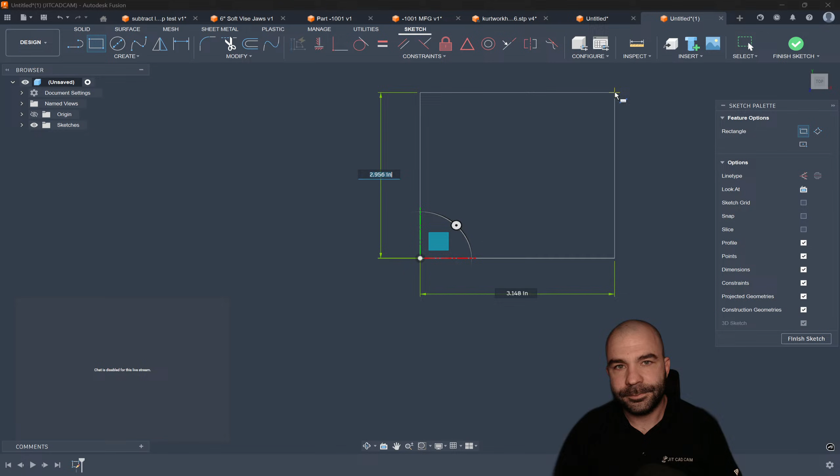Okay, so if you guys are wondering what he is referring to, at the end of the day he is looking to basically measure a chamfer on a part. I'm going to just draw one - I think it'll be way easier for me to do this. Let's say, for example, I have a block, and that block has a hole, and let's just go with a 1/2 inch hole.

Now, if I had a chamfer on that hole, say it's 0.03, in order to measure a chamfer, what he's more or less going to have to do is place a ball bearing in that hole, if that makes sense. Once you place a ball bearing in there, you have the freedom to utilize the measurement of the ball itself. So I'm going to go ahead and draw this here real quick.

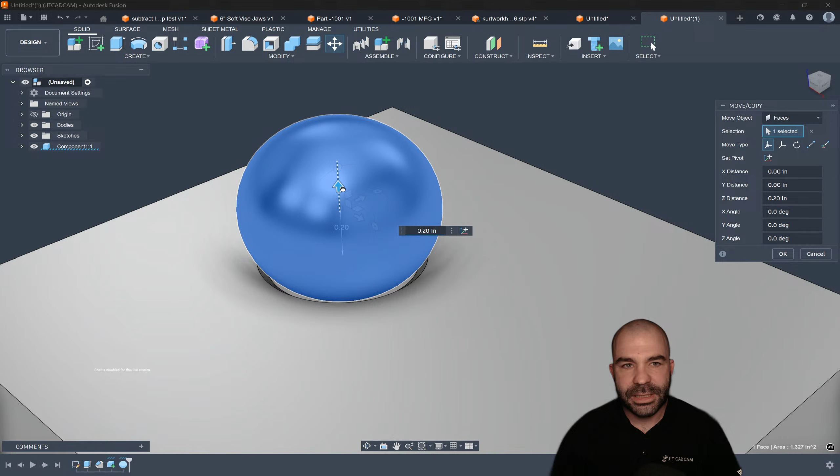I'm going to put it on center, and this is for visual purposes, as you guys will see. This is now a new component in this case, and then we are going to move this up. So what we're looking for at the end of the day is - give me a second to clean this up. Got to throw a few dimensions in here. This makes the whole thing a little easier to understand. And then we're going to go ahead and move that.

We won't be able to - we're going to do the sphere after the move. And alright, so here is our sphere. Most of this is for visual representation, guys. And we're going to say new component, and let's say it's a 1 inch - oh, that's going to probably be overkill. Let's do 750.

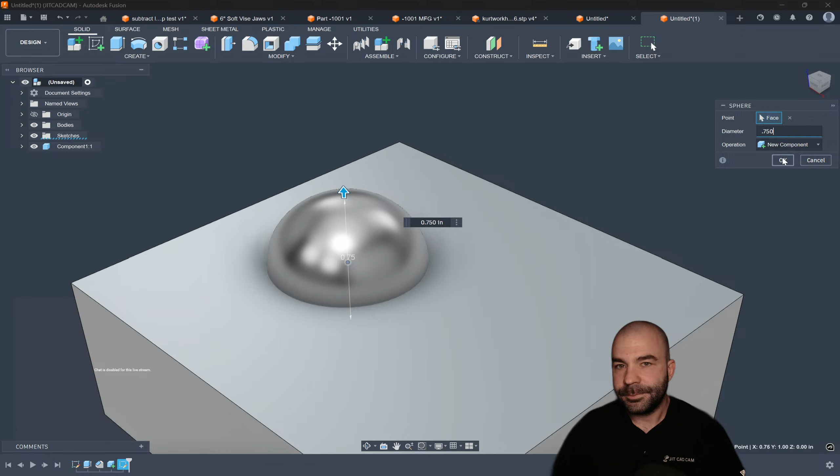Now let's do our move command, just high enough so we could visually see this when I do a section analysis. Some of you at home are probably wondering why I did all that extra work - it's so that we can get to an exact location to see. The idea is that sphere at the end of the day needs to make contact with the edges of the chamfer, right?

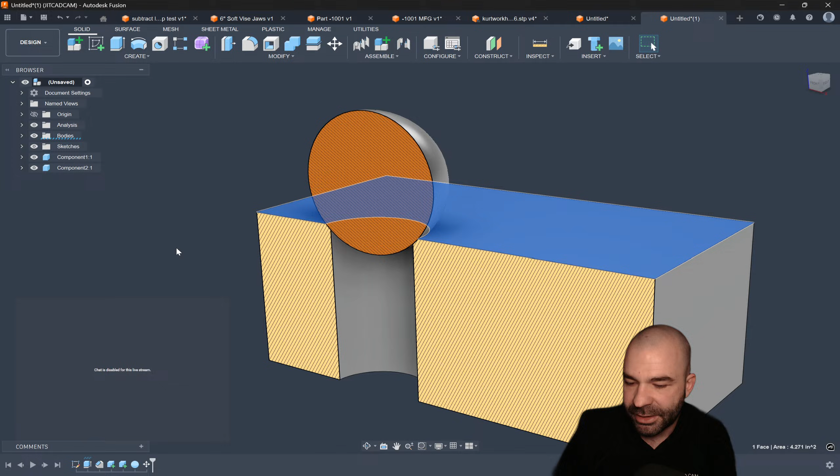So now what I have the ability to do is if I had a ball bearing on my part, I could more or less measure from this flat to the top of the bearing to give myself a dimension. Now, adjust size with the programmed Z depth - okay, so you do this with a spot drill on tight callouts. Yep, so as you guys are seeing, I just want to give you the visualization that if you didn't know this, you can get tooling balls - ball bearings work. Again, the idea is that you're putting the ball on the chamfered surface so that you can measure from the flat to basically the top of the ball, and there's going to be a dimension there in some way, shape, or form.

Now, I modeled this to give you an understanding of how it works. You don't need to model this because really, if I would have done this as a 2D sketch, there's a lot of ways to do this at the end of the day. But as you'll see, if I simply create a circle and a rectangle, I could also model in those chamfers inside of here. This is 100% up to you guys, how you want to do this.

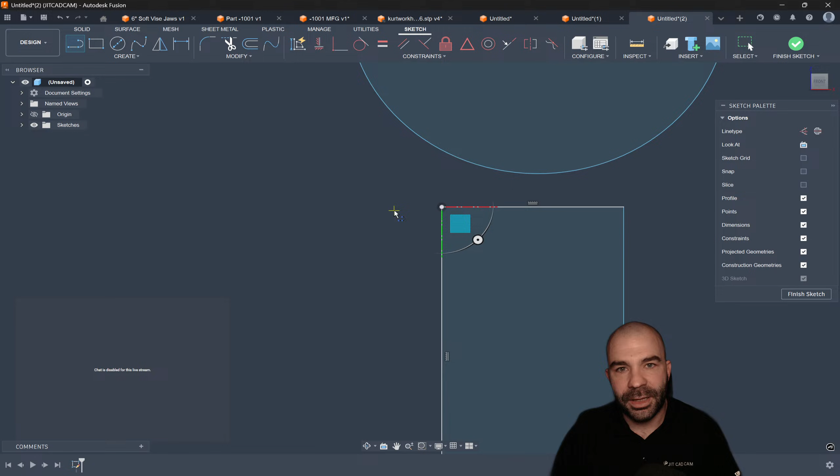Now, as you'll see here, I'm going to do this with lines, because again, you have your chamfer. We are going to now do our horizontal vertical over center. And this would be, at the end of the day, something I would build out as a template reference, if that makes sense. Again, we're going to go ahead and go tangent this to this.

Maybe not. We need to bring our sphere down first. All right, tangent this guy to this guy. Now, if this was a 45-degree chamfer, as you can see, based on our sphere, there's going to be a hole size here. Again, center line. Let's say that's a 1-inch hole. And I am looking to use something like a 1.5 diameter ball.

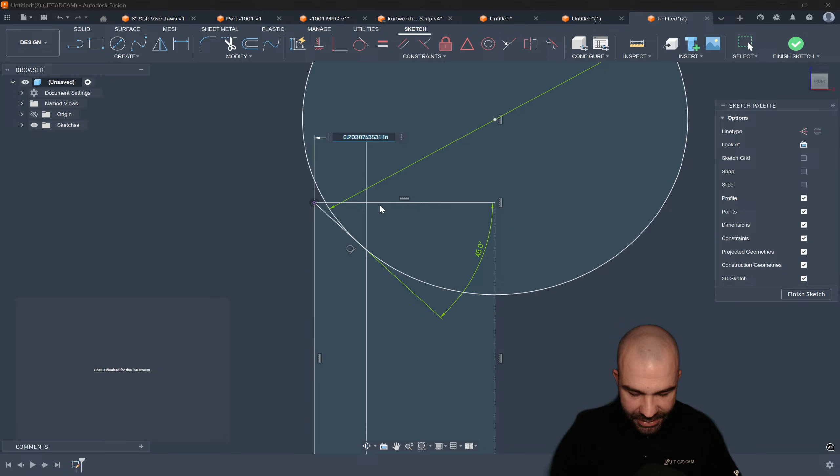Again, your chamfer is going to have a size to it too, guys. This is, again, I shouldn't say this is standard information. I've made that mistake before because then people are like, oh, I had no idea about this, that, and the other. So what I'm really looking for is, when this ball makes contact on that surface, there is going to be a distance from this line, which is going to be the flat of our part.

And now I'm right-clicking to pick arc tangent, but that's what I'm looking for, right? So again, if your hole gets bigger in diameter, let's say it goes to 1.005, you're going to notice this dimension is now changed over on the left. So again, this is just a very crude sketch that I drew. Let's say the diameter of the ball changes to 1 inch. Obviously, it's not going to make contact on the flat, so that makes no sense. But this is what I'm really looking for, is this dimension here controls everything at the end of the day.

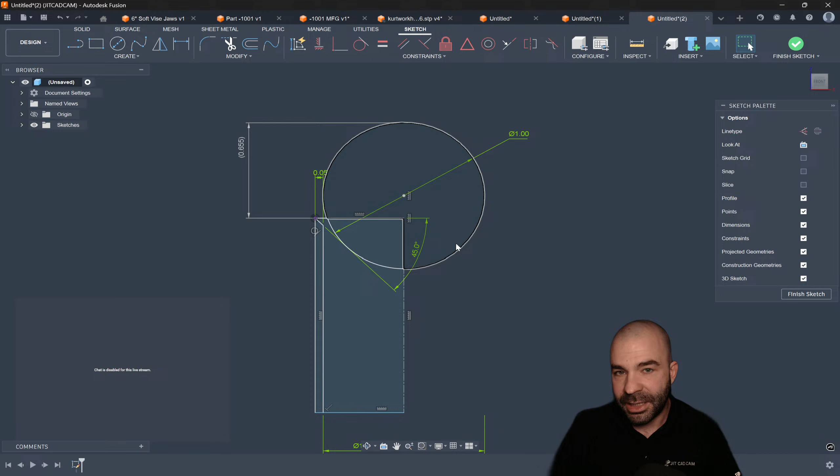Or I could do this backwards from the way you guys are seeing it. Again, I'm using this as a reference dimension where I may need to change that from a reference dimension, or change what dimension I'm trying to trigger. So again, if this chamfer becomes bigger at the end of the day, it's now shifted my ball around, and this is the wrong size ball. But this is, again, I just want you guys to see this is the out-of-the-box thinking that makes a large difference at the end of the day on where that ball is going to sit on the chamfer.

Now, again, we could do this a little bit different, where I'm using a tangent constraint between the arc and that flat, and then I'm also locking it in horizontal vertical. So the way you constrain this is, the idea is the ball would never change, but if the chamfer changes, the ball is going to sit lower or higher. It's the diameter of the chamfer that makes all the difference, right? So again, something that you could do to be able to program that up.

Again, jumping back to the other side of things, all we're looking for is when you CMM, or if you have a height gauge, is that distance from here to the top of the sphere, which puts you, again, that face sitting where the sphere touches tangentially.

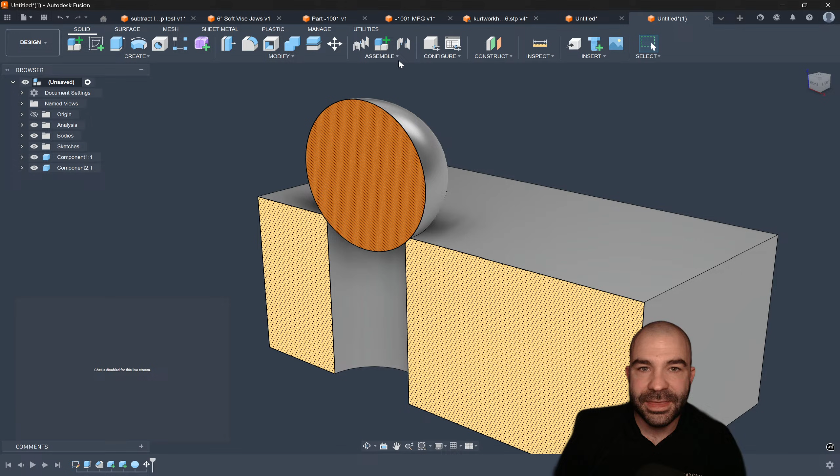Now, one thing I will do here real quick, because I've always kind of been curious about this, Fusion does have what's called tangent relations. So if we said I want a relationship between here and here, as you can see, it doesn't look like that one works, but then there is also constrain components. So let's see, can we constrain this component to that component? And it does look like you can. So that would be super neat if you could. I don't know if you can for sure.

Let's try something else real quick, which would be, let's move the ball higher up and try that one more time.

Constrain. Yeah, so it doesn't look like it's going to snap down face to face. It doesn't quite want to handle that right now. So again, that constraint component is not placing it tangent surface to surface.

A lot of different ways to do it. Again, I'm just showing you guys that kind of out-of-the-box system that you could use as a machinist to figure out what that's supposed to be to measure.

Questions outside of that? So I see Ash has submitted a ticket. Let me get back over to the other side of things. Go ahead and download this file real quick and get it uploaded.

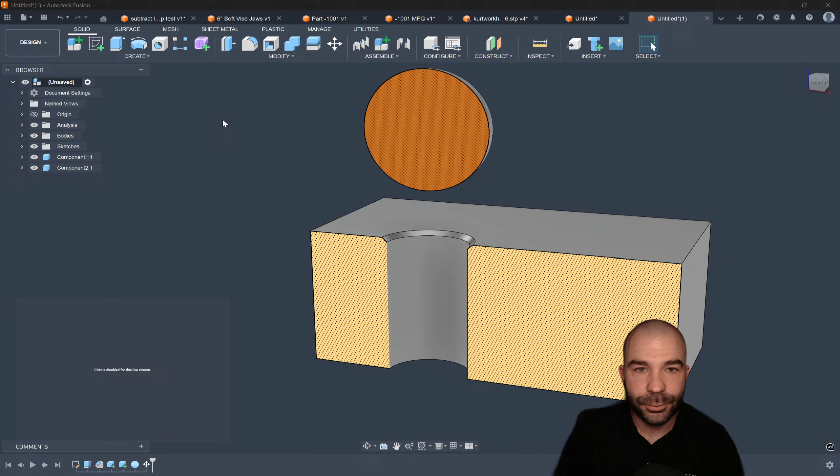My wife pointed out to me, guys, that when you sign up, you should get something, and I don't know what you guys should get. So it's one of those things where we're trying to figure out what we should do special for the top tier subscription subscribers. Should you get a photo of me drinking a beer? Is that what we should go for?

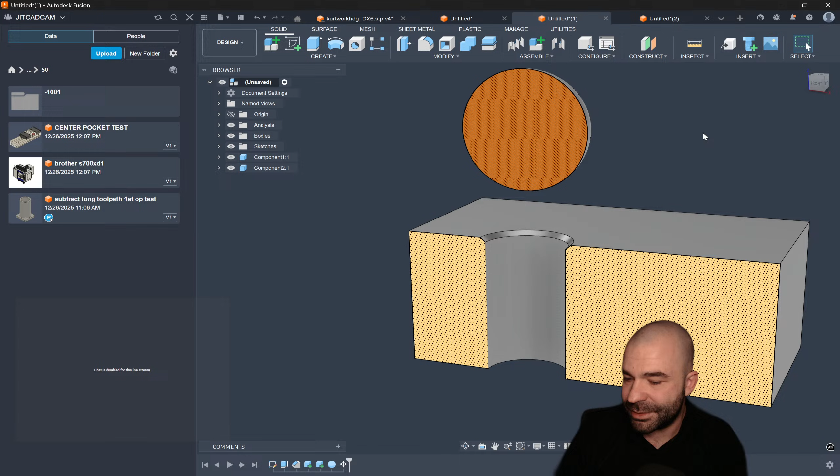Is there a specific DNC you like to use? Well, Fish, yes, there is. Autodesk now offers their own online software for DNC. There's also an app called DNC, or there's a software company, DNC for You, also very good benefits there. And then there's a serial to NC plugin for Fusion that works quite well too.

Mike Godfrey out there with the laughter. Love to see it. So let's see what we got.

We got a center pocket test. So Ash, I know you said you were going to send in a file. You sent in a file. Did you send in any information with the file, or did I just get a file? I just got a file, that's all I got. Ash, what is it that you want me to do with this thing?

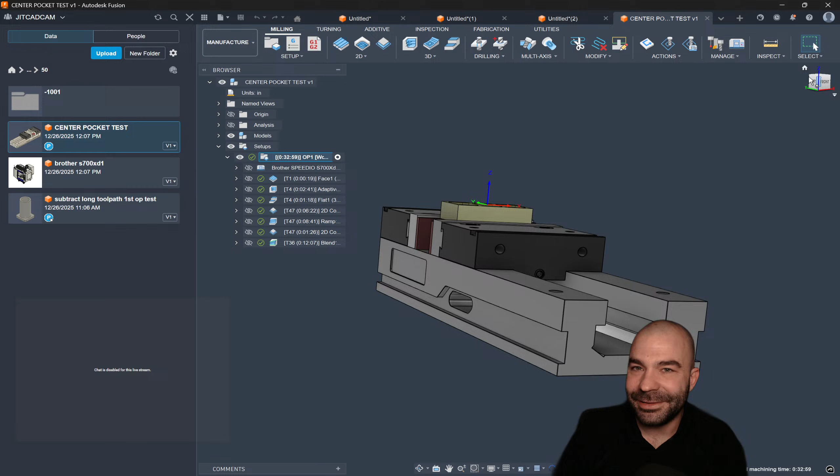I apologize, man. I see a part, I see a vise. Don't know what I'm supposed to do with it, but let's see here.

Overall, Brother Speedio, nice machine. Facing her off, cutting out our pockets. We're now machining the floors. We're then going around with a tapered end mill at the bottom, making a couple of passes to open that up. And from there, it looks like you're now doing a ramp around that guy.

Picture with a beer. You like the picture with a beer, Mike? Sure. I tell you what, you guys send up... I guess what I would have to, I don't know, I'll have to figure it out.

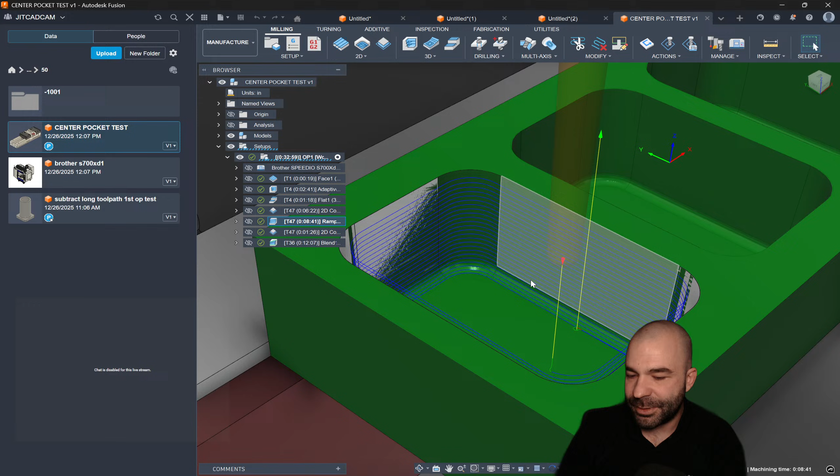I'm getting bad surface finish on the walls. I'm trying different strategies, speeds, and feeds to get the best finish. Need help improving surface quality.

So again, I don't want to be the one to say this, but it's a lot of stick out for a very narrow diametered end mill. So that is one place you could start with the idea that there could be an issue.

Now this is where it's going to get quite fun because I do remember some secret type stuff. You do have multiple step downs here. How are you doing them? You are, okay, so you are using a wall taper angle step down as well.

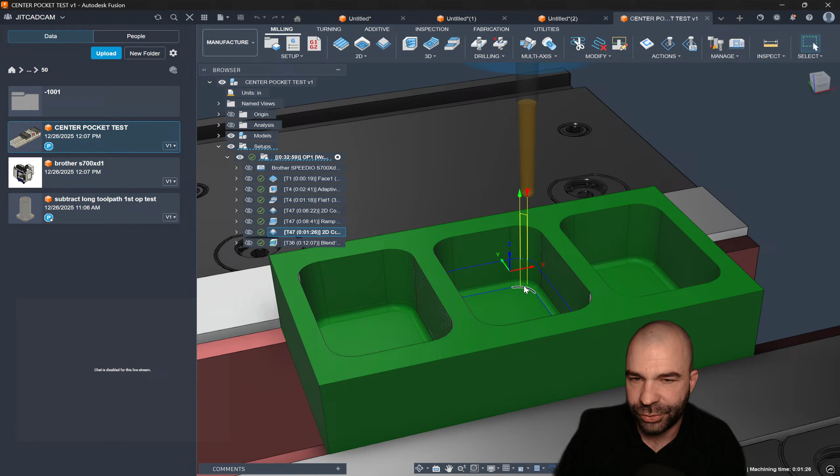Now, when you say you're getting terrible surface finish, I would have a couple of questions as to what that surface finish actually looks like. Is it very jagged? Is there a bunch of bad sound coming from the machine?

Things of that nature, because to me, it's not the best thing to tell most people, but if this is what you're going for, this would also be something a swarf toolpath would be very beneficial for. But let's do some investigating, right?

So we're at 8,000 RPMs, 12 inches per minute. Now, that might be a wee bit too spicy, regardless of your material. So let's start with a standard.

I'll pull up another chart here. So let's do this. One good thing, if you guys didn't know, in the Fusion library, you do have the vendor library, and then you have things like Harvey Tool end mills. There's a lot of different specialty tools out there. Now, the problem with some of these tools is they don't have all the speeds and feeds.

Now, if we went to the Haas tooling library, we're going to go with a standard flat end mill because it'll be easy to narrow this down. And then what we are looking for is, of course, a diameter in inch. And we have some 0625 diameters, right?

So what I would tell you first and foremost is let's look at some speeds and feeds for a few of these tools. Now, as you're going to see, these tools here are built for hard alloys versus aluminums. So all I'm doing here is looking to steal some speeds and feeds. So again, we have some 1/8 inch, high performance, aluminum.

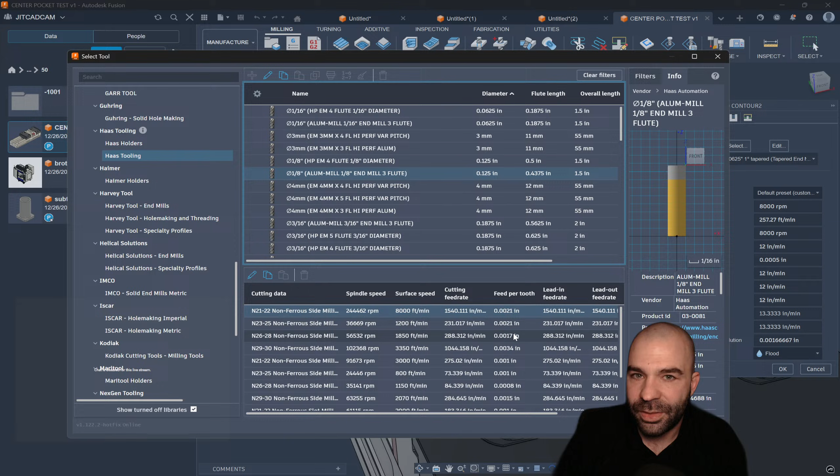So right now we're looking at a 2,000 chip load. We're even getting down to a 17. This is something that would be very wise to start looking at, because in their speeds and feed charts, they do have things like side milling HSM light, side milling, slot milling. This is where I think I would start if I was somebody trying to figure that out.

That being said, I think some of your problems are coming from you going almost too slow of a feed per tooth in this particular use case. If we up that to maybe a thou, we could see a night and day difference. So instead of you actually cutting material, you could be rubbing the tool, causing some of your own problems as well. So sometimes it's not necessarily too much feed rate, it's not enough, dependent on the tool.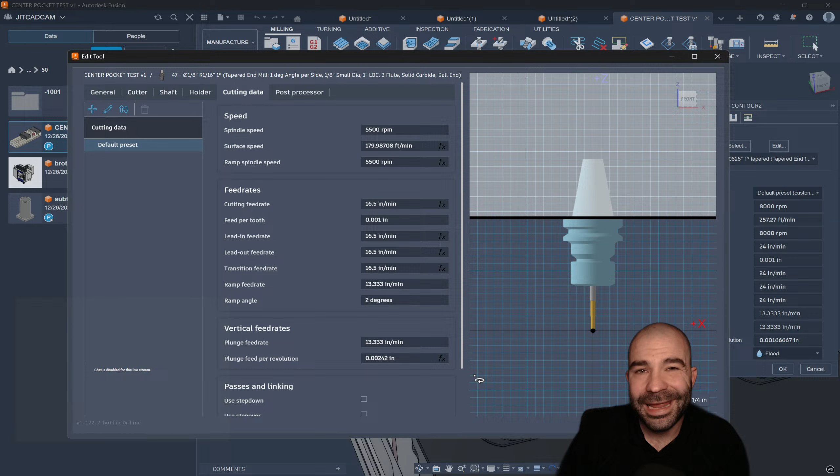I don't know what you have in here for this tool information. 3 flutes, so you should have plenty of flute relief. Now, going into your cutting data, this is where I think some things are happening, because you're saying 8,000 might be your max RPM. You might also be in a spot where that max RPM is causing some harmonics issues. So sometimes even dropping your RPM or raising your RPM can make a huge difference at the end of the day. Keep in mind, an end mill has to have something to get a bite on when you're machining in some use cases.

So, vectorize little line segments into single arcs. Fish, it does - it's called smoothing. Now, depending on your tool path, there's a lot of different things that you can use as well.

So Fish is asking, is there something along the lines of certain smoothing settings, or is there a limit on how high you should go? It's a little tricky of a question to answer, but usually what I recommend is, if we are roughing, I tend to match my tolerance to my drawing specs. So if your part is ±5 all over, I tend to go ±5 tolerance for roughing.

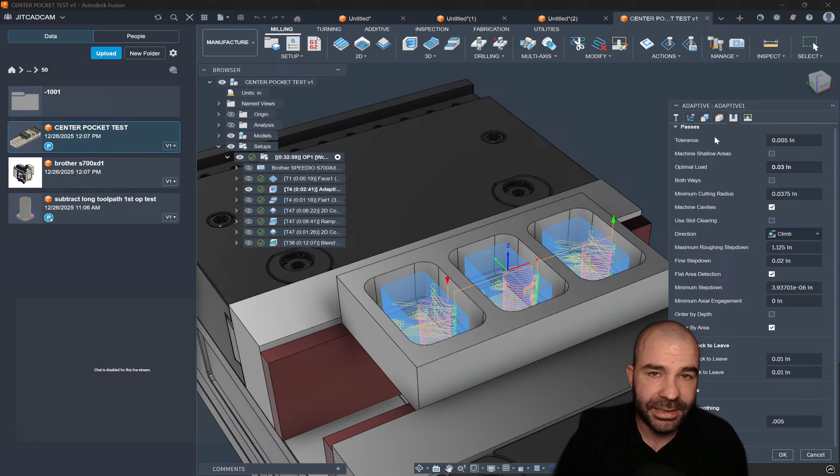And then from the standing of smoothing, you can go up quite a bit, because again, the idea is we are going to reduce the number of points. So I have a tendency to match my smoothing to whatever my tolerance is. Now, this is a roughing scenario. Going back over to the side of finishing, some of you have made these changes, some of you have not. If you are doing finishing, by default, it's set to 4/10.

Again, I go to smoothing. Smoothing matches my tolerance. Do you need 4/10 tolerance on a toolpath? No, I really don't think you do, unless you're dealing with some wild stuff. So this is where we tend to recommend even upping your tolerance more, closer to like 1 or 2 thou. And as you guys can see, the smoothing matches that.

Now, without seeing your part, it's so hard to really give you proper recommendations. Are we talking mold cavities? Are we talking simple parts? Fish, my assumption is you're running pretty simple parts on older machines. There's way more problems out there than I think you're having to deal with than smoothing at the end of the day.

Surface finish looks like this, tried multiple different speeds and feeds. Max RPM on the Speedio is 16K.

Nice, so let's go ahead and take a look here. I'm going to jump back over and pull this picture up for you guys. I've got to figure out the best way to do this, give me a sec here guys.

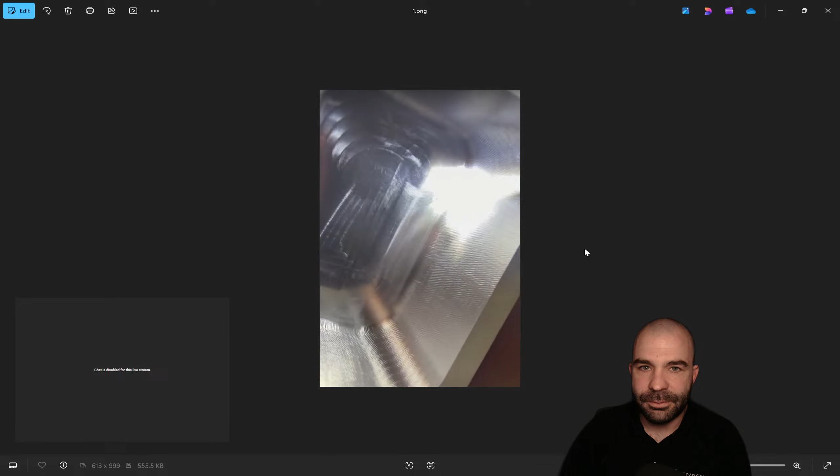There we go. As you guys may or may not be able to see right now, there is quite terrible surface finish inside that part. Now I would need to know real quick, what is the last toolpath ran before this photo? Ash? Because right now what you're showing me, that looks like tool deflection and vibration, plain and simple. So I think you're cutting way too much in whatever this toolpath was, and you're causing chatter.

Now I'm going to go back and let's look at a couple other things here real quick. He's adaptive clearing, leaving 10 on the walls, okay, finishing the floors, that's fine. So presumably we are going from 10 thou to leaving 15, or 1.5 I should say.

So, all right, so you're doing, all right, you're making multiple step overs at 3 thou. And if your tool is 0625, this is about a 5% step over, right? My math is correct, so about a 5% step over for finishing. And then it looks like you are going to make, again, a couple of finish passes at 3 thou.

Now this is, again, just so you guys know, this is where I would ask some questions. You're doing a finish feed rate of 12 here, and you are doing a cutting normal feed rate of 12 as well. So I would assume that there was no difference in audio between these two roughing and finishing toolpaths. So that would be one thing I would start to look at, is maybe you're doing way too small of material removal on these passes.

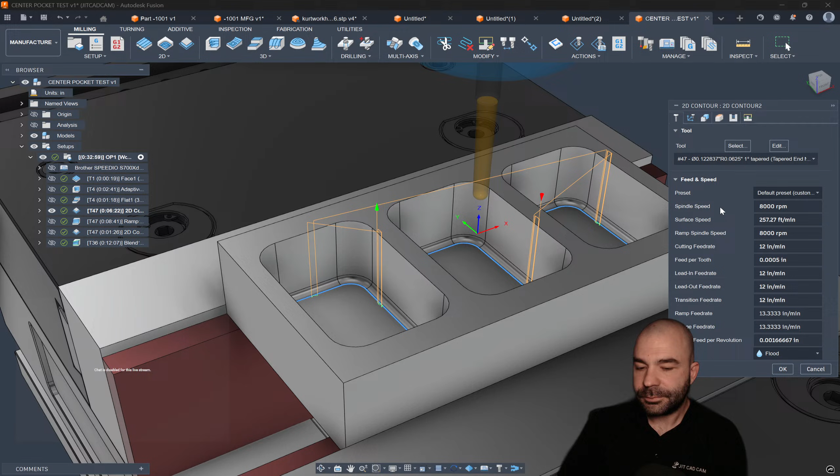Is there a secondary toolpath to take to final size? There's really not. You kind of got it narrowed down to either a ramp, or I would assume a 3D contour would be another version. Ramp is nice because you're going down in Z, but it's really hard to say which way is going to work best for this use case, right?

Is this the photo that you sent me the surface finish problems on? Is this the photo that had bad surface finish? Again, for those of you guys wondering, I think did I close the photo? I think I just lost my start bar somehow.

You guys still out there? You guys still hear me? There we go, again, let me get this pulled up for you guys. And I'm having one of them days.

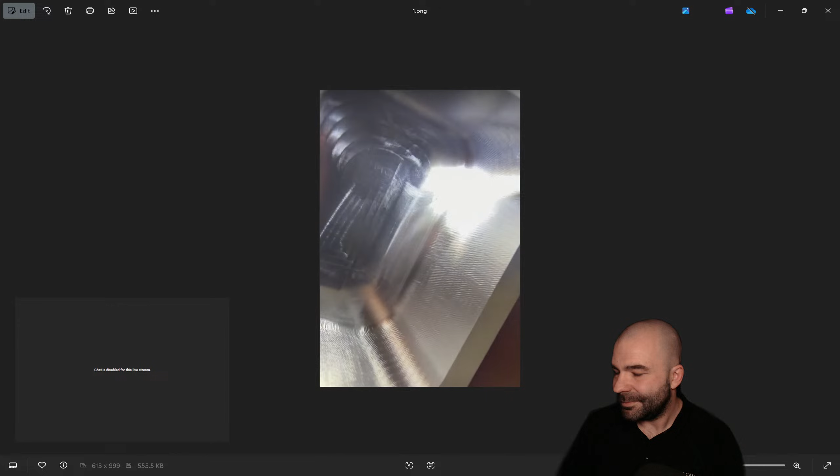So again, just from what I see here is you are getting tool deflection. It looks like standard chatter all the way around the part. Now let me look at something here because this did just remind me of something. I got a welt out there with the 10. Love to see it, thanks buddy.

So it was the 2D contour before the blend. Okay, so the contour and the ramp look very similar. So one thing I would tell you is judging by these tool marks around the bottom is when you ran the 2D contour. Now keep in mind, when you're deflecting a tool, it becomes a larger diameter tool, right? So you've now gouged up these walls, but let me just show you something. So when you did your roughing and then finished the floors, if you notice, there is a massive staircase here.

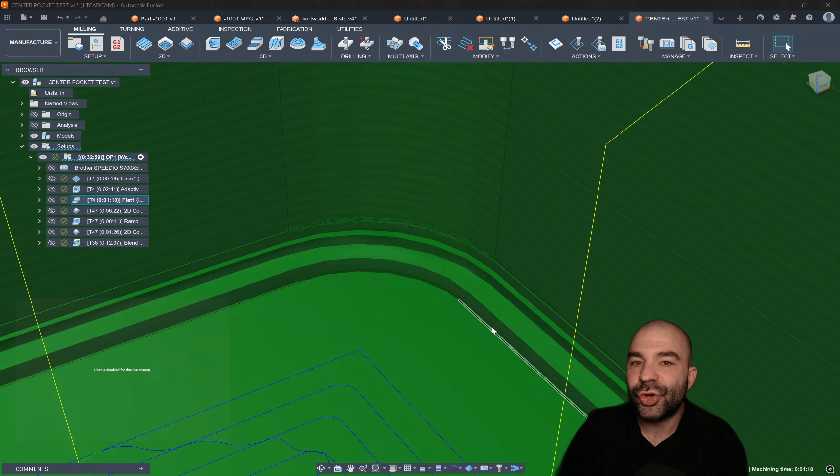Like you're walking up the stairs from the Rocky movie. And what I think has happened is you are machining almost on center of the tool, trying to remove this step in here right now, which is deflecting your tool a ton. Again, this is a lot of material still here to remove. And if you guys didn't know, this is kind of a cool thing that if you were to actually go in and simulate this.

Give my computer a second here to get caught up. Say we go ahead and hit play, let this do its thing. But now that we're done with that toolpath, you can inspect stock to model. If I come in here and put my mouse, do you see how I have 030 material right now?

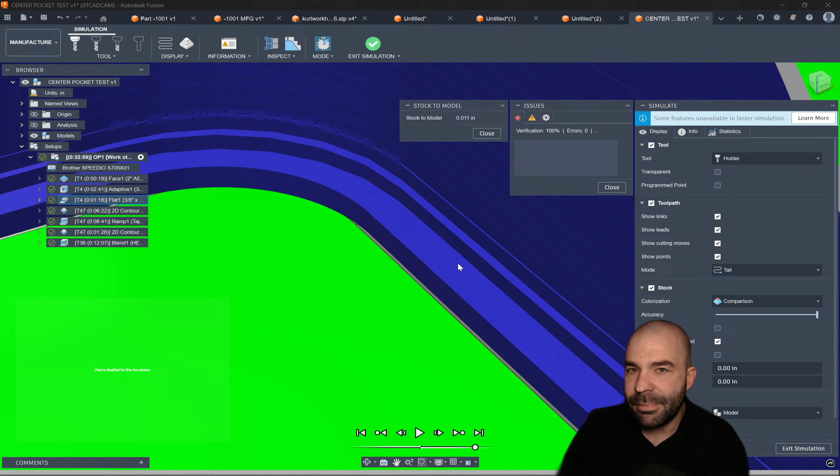Again, depending on where we're at or what wall we're touching, 020 to 024. That is a massive amount of material down there that you're having to remove at the end of the day, which could be a large part of what's happening on your end.

So as you guys are seeing me do here, you have the ability to do a section analysis as well. And that, in my opinion, is where your problem is probably coming from. So you cut this profile, and when you cut it, that tool took such a heavy cut trying to work outwards to remove material at the bottom that it deflected and caused all that chatter around the outside of your part.

So again, I'm just evaluating what you have here. You're leaving 1.5 on the walls, and then later you're trying to ramp back down at -2 thou, so you've tried to walk it out a little bit to make up that gap.

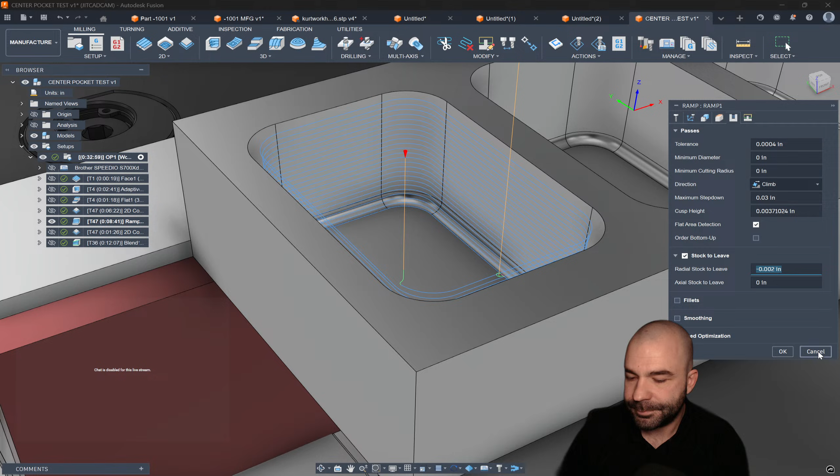So I can understand that you're saying that toolpath wasn't even finishing the walls, but you're still taking so much material down here at the bottom. If you're deflecting that tool at all, remember that tool is going to touch the walls, plain and simple.

Now if we go back and look at your actual ramp toolpath, something you might have to do, if you guys haven't done this in the past, is put an indicator on that tool and actually true it up to the spindle. That tool could be spinning a hair off center as well, loading up and deflecting.

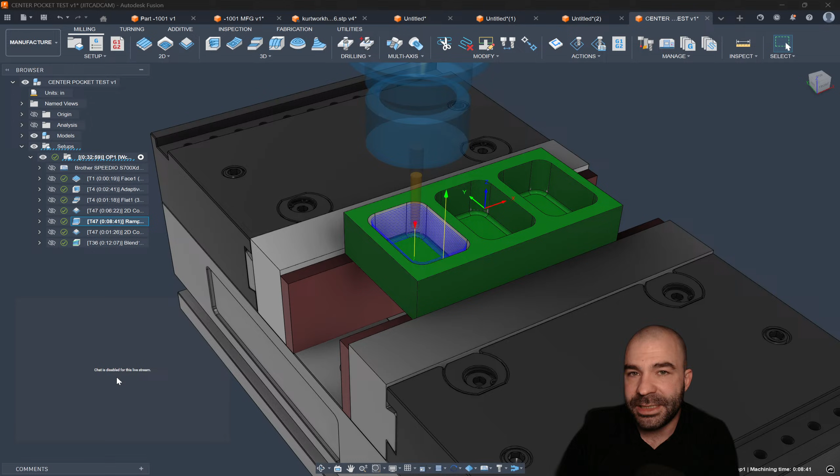If it's oscillating off center in any way possible, without dropping your feed rate by 80%, you wouldn't see the difference. I think there's a couple of things happening here, and I think it's more a speeds and feeds game, combined with the tool maybe not spinning on center.

Again, these are all variables I would look at, and I'd probably start with the easiest one: put a dial indicator on the spindle, spin that tool, and check if the actual shank of the tool is on center.

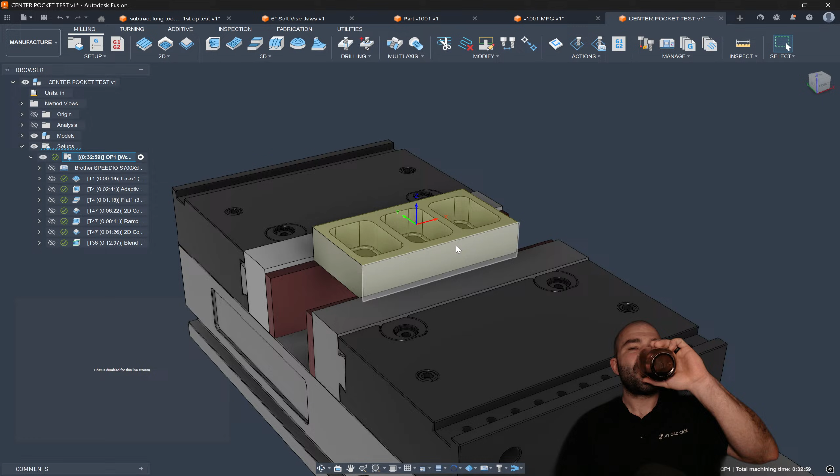Again, let's just go ahead and get this guy closed out. Don't need this guy. Finish up my coffee.

And support for Windows 10 is over. Is it? For the record, anybody watching this video right now, if you have a gaming laptop with an AMD processor and an AMD graphics card that can't be upgraded to Windows 11, please reach out to me. I need to buy a couple of those for some other projects.

Any way to directly import a step file to a component? Yeah, a little bit more information on that.

Going once, going twice, deep thinker. Directly import a step file to a component, are you saying... okay, as we're going to see, you can't open directly from your desktop into a file, if that's what you're asking. You have to upload it at the end of the day, first and foremost. Not open a body, okay.

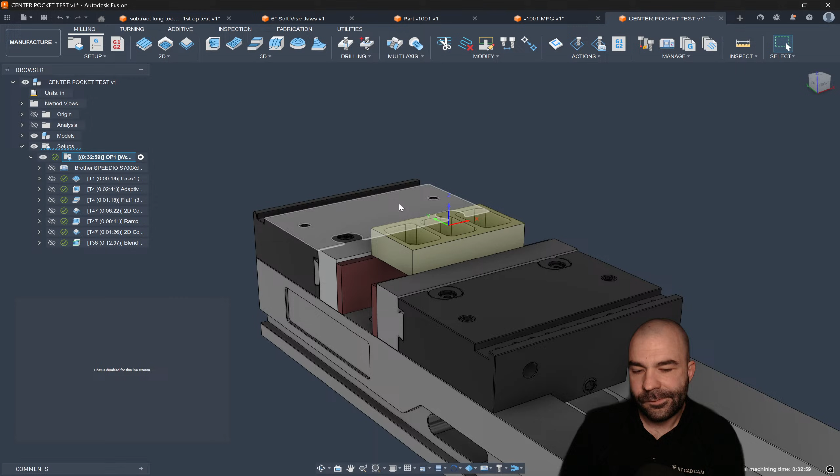Are you saying you want to keep the original file format, like a step file from a customer or something of that nature?

Going once, going twice. What you got, deep thinker?

Anybody else in the meantime? You guys have any questions? Feel free to reach out.

I'm gonna go ahead and double check our support ticket area, make sure there's nothing in there. Reminds me, I got to get a hold of Elijah after this to dive into more of his machine problems, why it's all over the place.

On contour selection, we do deep. Well, we definitely do. I'll show you guys some of that stuff here. When I get a model from a customer, I'd like to open it as a component, move it around.

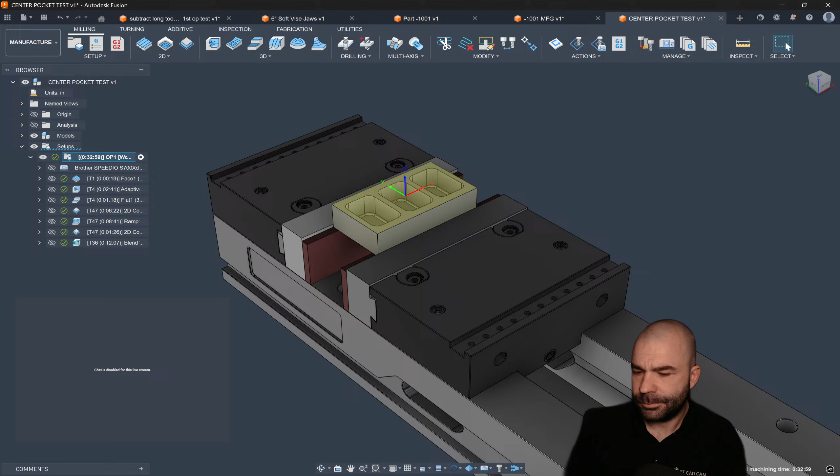So deep thinker, it's hard to say exactly what your end problem is, but what I would say is if you're looking to open it as a component, you need to either right click, insert it into your current design, or you need to drag and drop it into your design. Again, that's one of those things that I kind of need some more information or a use case as to exactly what you're going for. I mean, once you've uploaded that file and opened that file, whether or not you just do a standard open or insert it, you should be able to move it around with no problem.

I see a lot of questions out there from guys. Guys, real quick here, I'm going to pull up YouTube. Give me one sec here.

So we got some new things going on our side. As you guys may have not seen, we do have courses now. We have our Learn Something series for the mill and the lathe. These are our Milling Monday, Turning Tuesday videos. Now, from that, if you guys are looking for a specific video, I would highly recommend, I don't know why people always forget about this, I forget too, is the ability to search the actual website.